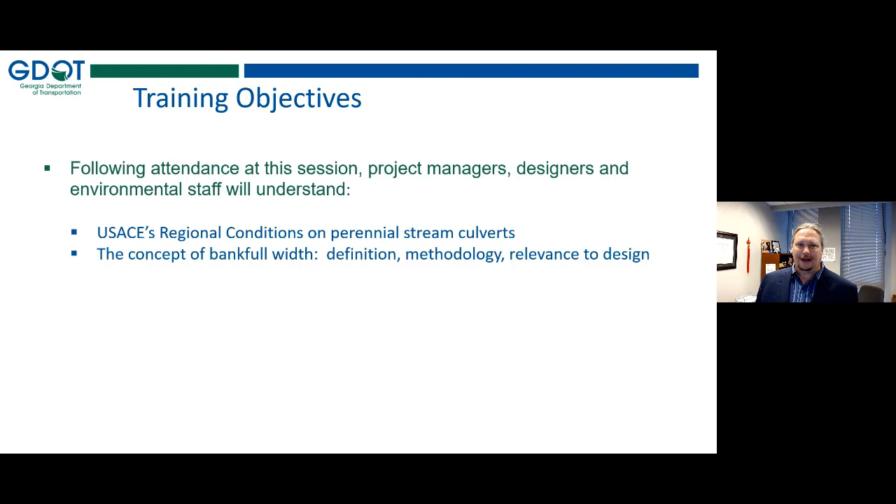All right, so the goals stated for today's session are the following. We want folks to understand the regional conditions as it pertains to perennial stream culverts. We want to make sure folks understand, as best anyone can, the definition or concepts of bankfull width and ways to identify that all-important metric. Bankfull width—that's a new phrase for you, get used to it.

Project delivery implications for projects with perennial stream culverts—this is really a summary point to make about project delivery. What's interesting about our presentation is that between myself and Sam, representing the Office of Environmental Services and the Office of Roadway Design, we have roles that hand things back and forth. Initially, when ecologists are doing resource ID, we will be the ones to identify these perennial streams and make the first field estimate of the bankfull width, hopefully an accurate measurement. We're also going to talk about what Sam's folks, the designers, can do as well as ecologists can do, in advance of that field work and after it.

Project delivery implications begin when we're doing these surveys for resource ID, and it carries all the way through permit application, which is just prior to let. In terms of project delivery, where the rubber meets the road is generally at let, and if we cannot obtain permit authorization, we cannot certify the project for let. So that's what makes this such an important topic for us all to know about.

Sam is going to dig further into how to design a culvert that complies with these regional conditions, and also how to address perennial stream culvert requirements, including diagrams for the Section 404 permit application. Okay, without further ado, I'm going to give my portion of the presentation here.

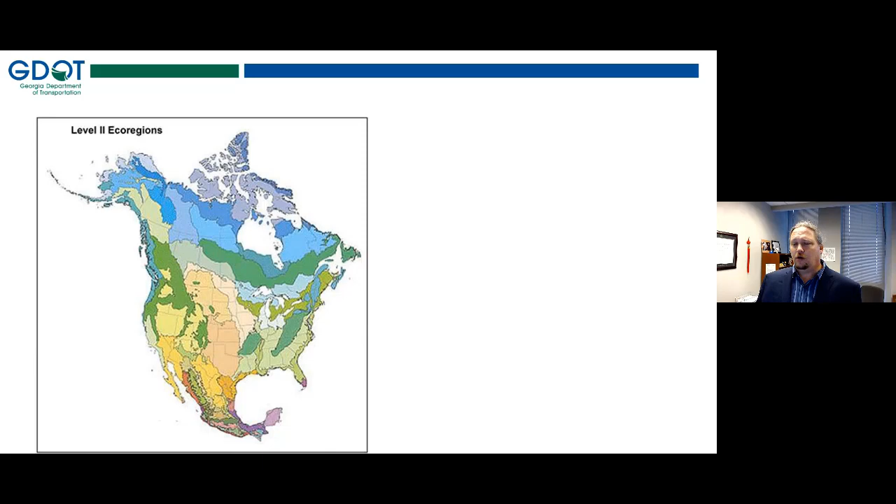Water is all coursing over our state on its way back to the oceans, either the Atlantic Ocean or the Gulf of Mexico, which is an extension of the Atlantic. That water on its way has hundreds of miles to go. So even though it's contained entirely within the state of Georgia, the Altamaha River and its extensions, the Ocmulgee and the Oconee going furthest upstream, if you put your canoe in at the very upstream end and got to the Atlantic Ocean, you would have traveled nearly 400 miles. This is not a 400-mile tall state.

Sinuosity. Water does not travel in straight lines. That's another key to this. When we put water in straight lines, such as in a box culvert, we are greatly modifying what water naturally does when it interacts with other more natural substrates.

So again, I'm introducing these broad themes so that y'all can understand the goals of our data collection and how we're going to present that data to the U.S. Army Corps when dealing with box culverts on perennial streams.

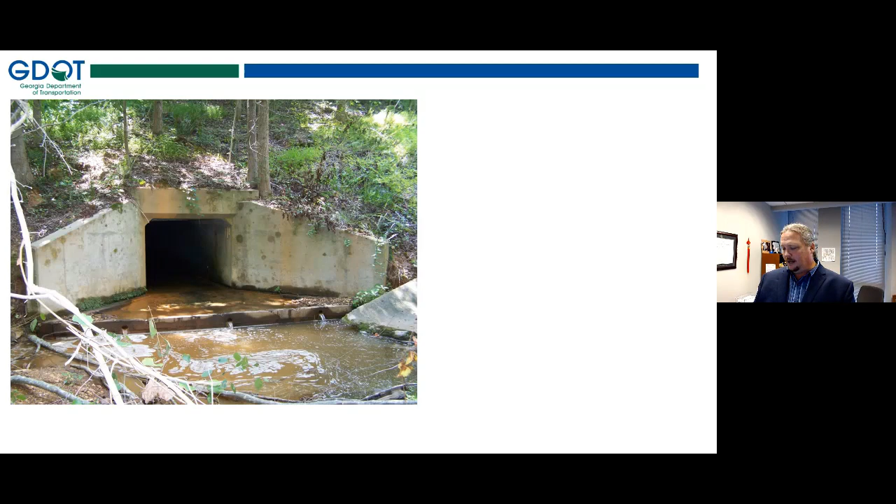Another thing about this culvert is it doesn't have natural substrate on the bottom of it. Natural substrate is obviously something that creates habitat within a stream system. It creates dynamic flows within, eddies and so on for the water. There's shelter for critters within that substrate. If you have what's essentially a sidewalk paved on the bottom of your culvert, you don't provide any of those things for this aquatic life that formerly was using, presumably, that reach of stream.

So in order to try and be thoughtful about maintaining aquatic connectivity while building roads, we need to not just think about how we're getting humans over top of the stream, not just how we're getting traffic over top of the stream, and not just how we're getting water off our roads to keep them safe. All those things are important. Those are all goals of the Georgia Department of Transportation. Another goal ought to be maintaining aquatic connectivity. This is no small thing, because you can't just put your fish on a leash and walk across the street with it.

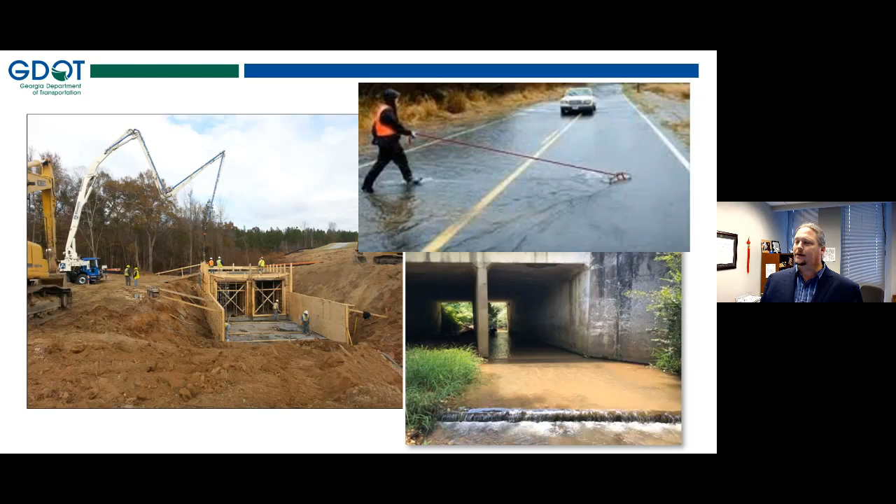I will say that these culvert lips and so on, going out there over time, it can be difficult to conceive of a culvert you're going to put in place that will be there for, say, 50 plus years, while this dynamic system is operating around it, upstream and downstream of it. It is not necessarily a surprise that these changes in elevation occur over time due to scour and other erosional forces. What we can do is anticipate that, and that's why embedding culverts is so much better, in theory anyhow. And it makes sense to me that when we embed the culvert, when we allow natural substrate to colonize the bottom of that culvert, we're providing all kinds of benefits to that stream system, as well as the connectivity for aquatic life.

All right, so that is the broad view of why this matters. That's the broad view of why the U.S. Army Corps is requiring GDOT to be thoughtful about our approach to this. And at this stage, I want to turn to the U.S. Army Corps' regional conditions on this subject.

I will say at the outset here that regional conditions, there's two things. There's regional conditions and regional permits. I've gone over this once before in a previous summer seminar series, but to reiterate, we have nationwide permits and regional permits, both of which have culvert considerations, and the latest version of those to come out is associated with the 2021 nationwide permits. What is confusing, and I'll try and explain clearly here, is right now we have essentially three different sets of conditions that could apply to these things, which is to say the 2021 nationwide permit regional conditions. We also have an existing set of 2017 nationwide permit regional conditions, which have not yet expired.

These new ones didn't replace all the old ones. And then finally, we have a set of regional permits issued by the Savannah District, and those also contain requirements related to perennial stream culverts. So to try and cut to the chase about what is the right resource to look at, let's all turn our mindset to the culvert conditions in the 2021 nationwide regional conditions.

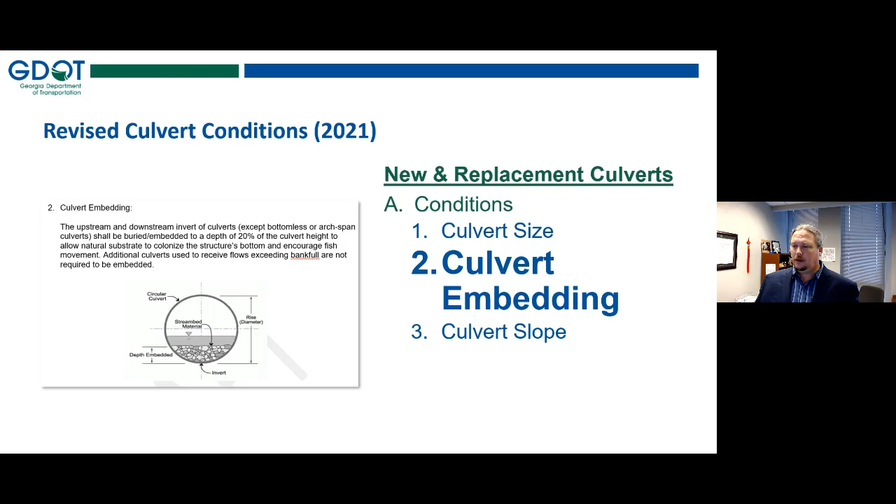Culvert slope is important. This didn't change much from the previous iterations, but one additional detail that's been added for clarity is that the goal is to match the existing stream channel slope within 25%.

If that can't be accomplished, a couple of things: one, we would explain to the Corps why that's not doable in that situation. Another important thing to bear in mind is that even if we can't get within 25%, we could still have a grade adequate for aquatic passage. So while that is the goal, it's not a hard and fast rule we cannot violate. That would make certain situations unconstructible, I believe.

Diagrams are a big deal now, so I'm going to look ahead at what the diagrams are here first, to kind of begin with the end in mind, as Sam likes to say.

What I want to do here is let you all know the intent, the outcome, for these efforts collaborating between ecology and design, and what is going to be submitted to the U.S. Army Corps of Engineers to approve these permit applications.

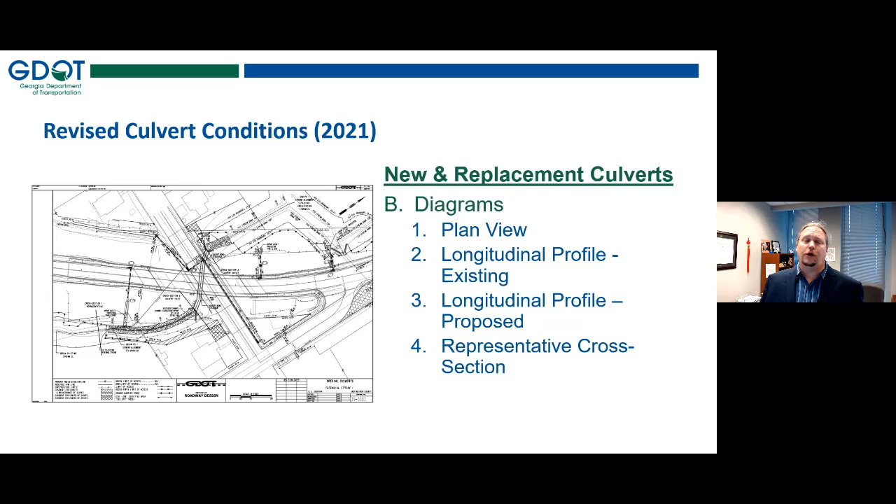The representative cross sections are very helpful - I'll talk more about why that term 'representative' is important. Then cross sections of the proposed inlet and outlet location, making sure the stream channel ties in to the culvert when we're picking up and putting down that stream, so those elevations match ideally. Bearing in mind the 20% embedment, by the way.

Here's an example of the existing longitudinal profile next to a proposed longitudinal profile. In this instance, this is effectively a schematic.

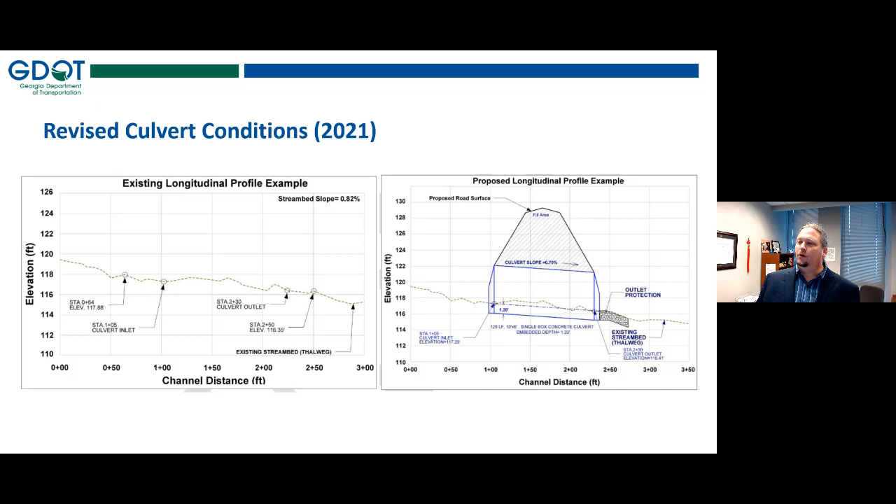In reality, we'll talk about the complications involved in gathering longitudinal profile data, but suffice it to say, this is what we're getting at - trying to take a sidelong view of the culvert to make sure we're meeting all the conditions with regard to slope, embedment, and size, particularly width. Width isn't a dimension we're looking at on the long pros, but width comes into play when we get to these cross sections.

As you can see, we've got a couple of terms here. I want to pause and let folks know flood prone and bankful look a lot like some other words. Bankful, in an ideal situation, in a stream system that may have achieved equilibrium for this moment in time, can truly mean top of bank to top of bank, and it's defined that way in many resources.

However, in Georgia, with our erodible soils and our very changed landscape over the last couple of centuries, we often have streams undergoing active morphologic change. When that's happening, bankful is generally not flush with the top of bank. Over my career, bankful has been a stumbling block for many folks because they assume it means what it sounds like - when the banks are full. That's not what it means. I'll give you a real definition so I don't give you a 'Dave definition' - otherwise it'll be something like humans are chock full of water, bankful is chock full of water.

Flood prone area is also a bit confusing because it sounds so much like floodplain. Floodplains are real things - you can see one here. The existing ground may well be the floodplain, although with bankful down low, that existing ground labeled may be a former floodplain, and now this system is cutting down and reestablishing a new floodplain inside that broader channel.

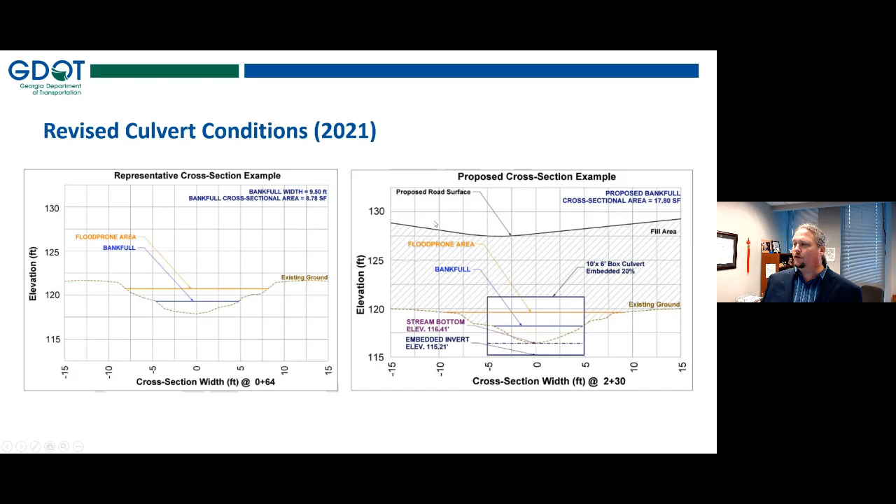So if that blows your mind, welcome to the joy that is trying to imagine what streams are going to do over time. Our best effort to identify bankful should yield a meaningful width for our culverts. Turning to the diagram on the right, you can see we're trying to find the right size of culvert that will accommodate bankful, but no smaller than bankful. You don't want to overly constrict a stream channel. That does bad things as well.

I'll also speak to the fact that we have plenty of projects that are beyond resource ID. In those situations, we'll talk about what you can do to try and make sure you have all the necessary information to create these diagrams and get these permit authorizations.

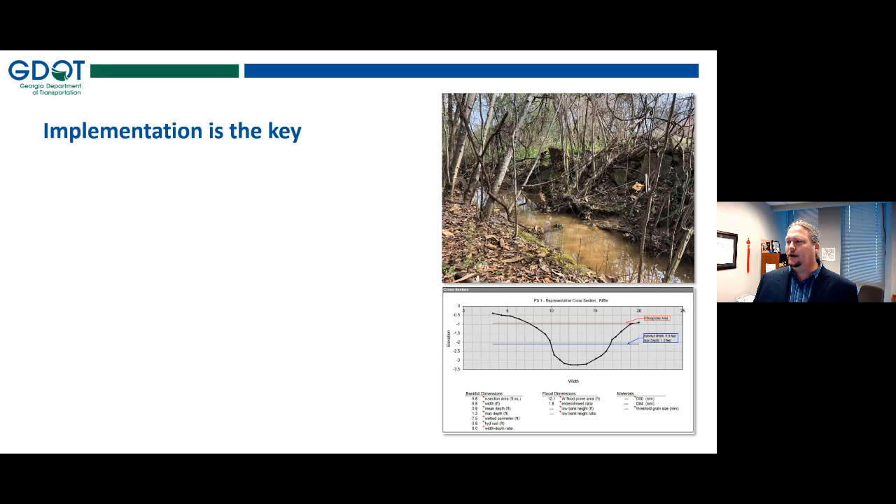So you take all these thoughts, all these ideas, all these concepts, you gather all of your data, and what are you going to do with it, and how are you going to gather that data as well? Implementation is the key here, and as I've said, we're reactive on projects already out of the gate where resource ID is in our rear view mirror, but in the future we're going to build that into our surveys from the very beginning of a project.

Also reactive in a sense that we have received comments from the Corps over the last 12 to 18 months on these issues consistently, and we've got a good body of practice now built out of the responses to those questions, and that's what we're sharing today.

I want to say that we're trying to turn to a proactive posture, not only for future projects, but even on ongoing projects, because those are all on their way to let at this point, and how we're going to gather the data for those is one of the key items we're going to talk about.

We're also going to dig further into coordination between ecology and design, talk more about what the internal guidance is that's available and that will become available.

And then in terms of permit submittals, I can't say this enough, and the Corps tells us this all the time: tell the story. What I've presented here, in case this isn't something you've thought of before, this is an important piece of our permit applications. Most ecologists have been through this.

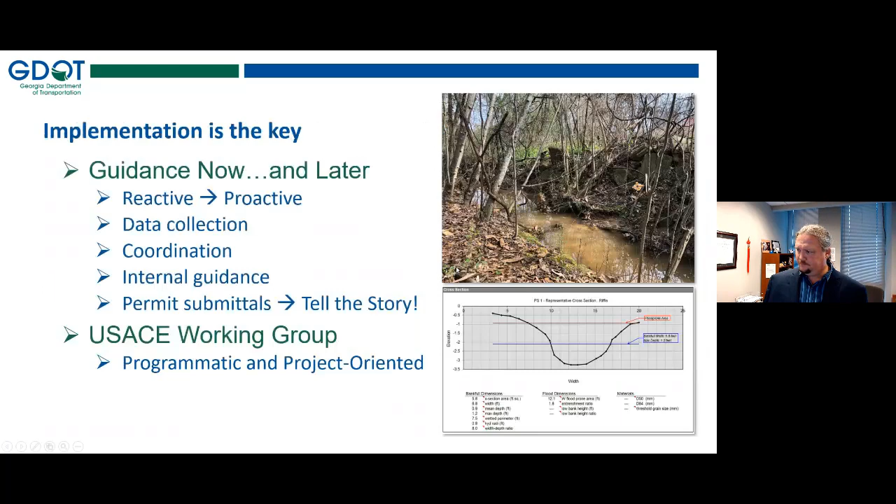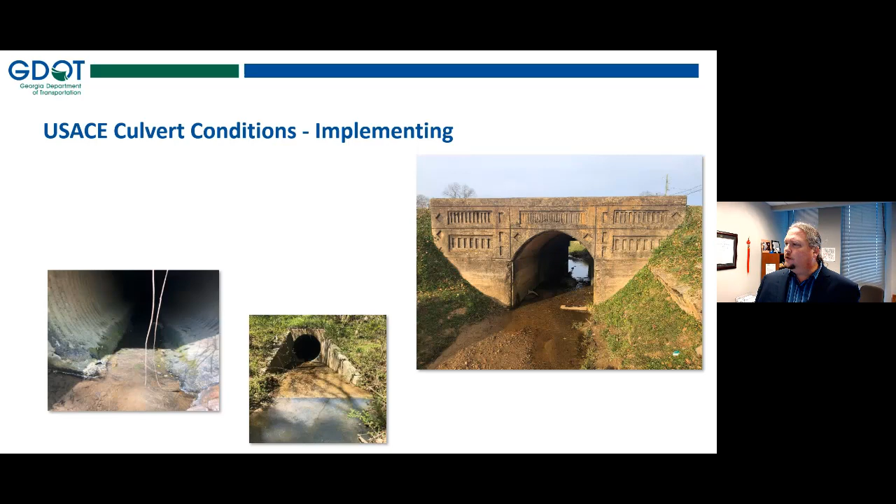Okay, so moving ahead, I'll dig into field data collection, coordination with design. We'll talk about ongoing projects and share tips for permit applications for ecologists.

Field data collection, as I said, can be done carefully or it can be done quickly. In terms of how careful we need folks to be, don't just glance at the stream and say that's about 8 feet and go on. Take the time to walk the reach, take the time to understand what you're dealing with, and take the appropriate instruments and equipment to get accurate measurements.

So for new projects, resource ID at perennial streams is important. Not all perennial streams that show up in an environmental survey boundary would require this level of diagrams, but when there's a perennial stream on a project, it's good to get these Bankful measurements correct. That part doesn't change from perennial stream to perennial stream. But in terms of which locations require these diagrams for perennial stream culverts, obviously it's only the perennial streams that are going to have culverts on them, not perennial streams that just nick the edge of the environmental survey boundary.

So while you're out there, Bankful width and maximum depth at Bankful are the critical data points to get. We also need a GPS point so that we know exactly where this data was gathered from, and photos, documentation, and narratives. Can't say enough about this: while you're on site, do the work while you're there, get all the information you can. It's always frustrating to come back to the office and think, man, I wish I would have written that down, what did I see over there. So that's a hard lesson learned from doing field work.

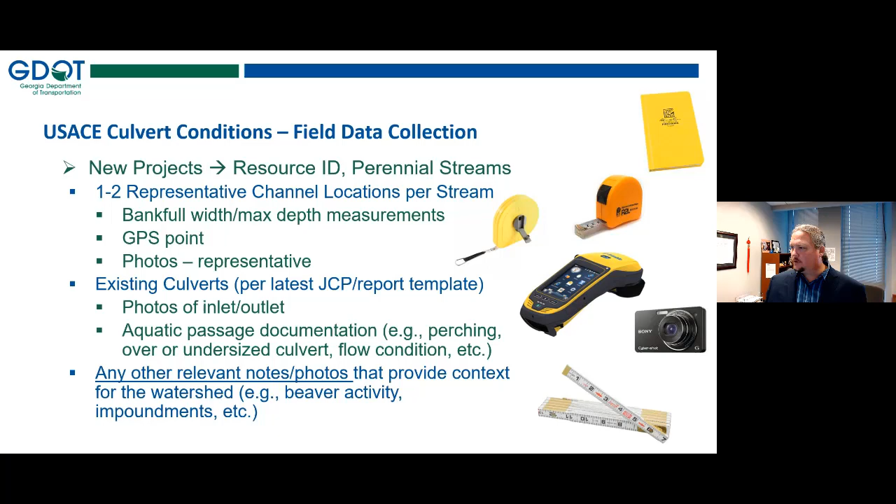So how do you identify these representative channel locations? A riffle or a ripple is a fine place to do it. Again, these are stream geomorphology terms — ripple is specific to sandbed streams. Forgive me if I mentioned earlier, runs are not the ideal location, although if you're unable to find a riffle or a ripple in your given area, a run is probably your next best place to look.

You're looking for what's stable, typical, and most natural, and you want to avoid pools, bends, and overly wide or constricted locations or abnormal sections. Those aren't going to be informative.

One other thing that we used to do that we should not do anymore, y'all: giving a range of bankfull. Bankful, again, this theory holds that there is a given point within that channel that is the appropriate width and height for what I'm calling effectively the stream typical section.

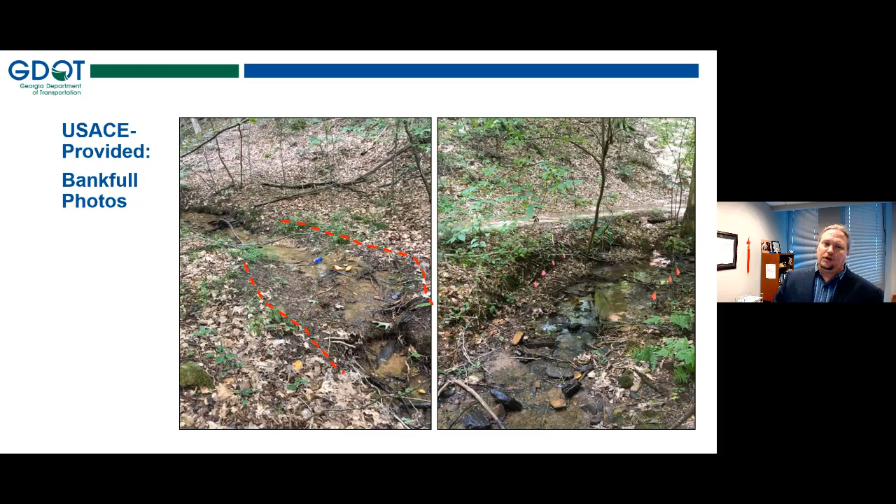Here's some more bankfull photos. The U.S. Army Corps of Engineers provided these. This again may not be what you're expecting when you hear the term bankful. On the left, the Corps has input some dashed lines as an indication of where bankful would be on this system. And on the right, you can see that bankful is apparently flagged.

Tough bankfull calls, I've talked about these plenty, but here they are. Imagine being an ecologist and somebody says, just look for the wrack line and the benches and so on in this system. Well, this system is getting plowed through by so much water at a time, and the banks are unstable enough that this thing is changing rapidly. When that's happening, channel evolution continues. It forms and it reforms and it reforms.

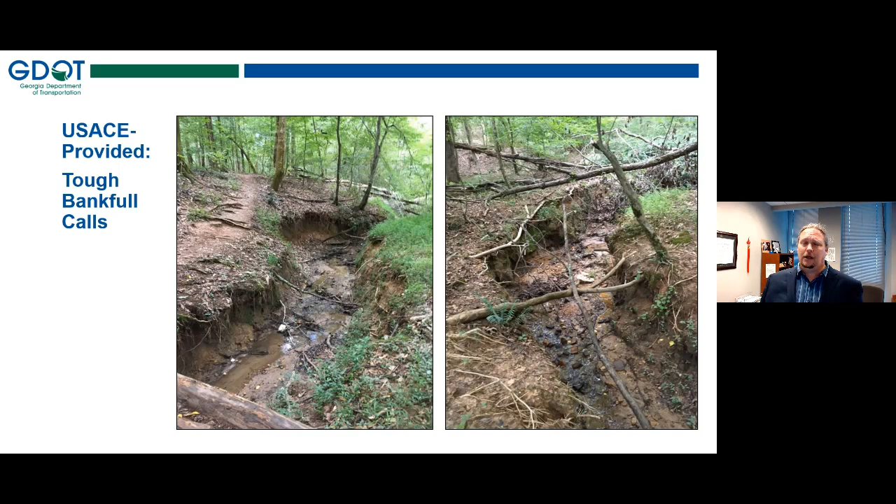So through chaos, order emerges over time, but right now what we're looking at is chaos. That is a very difficult system to take engineering principles and careful measurements in and say, with great confidence, I can tell you the exact right width of this system is X. I'm not trying to diminish the challenge here for the ecologists, but I am saying we all need to rise to this challenge if we're going to try and reconnect these watersheds that otherwise we as a department risk disconnecting through our activities.

Coming from Penn State, they've got a good resource in terms of guidance determining bankfull, and I just wanted to share some of what they've put out.

Bankful flow is the elevation point of incipient flooding, which makes sense to me. I'm not qualified to question others' definitions here, but I will say that the point of incipient flooding can be a little bit misleading because it sounds like top of bank. And again, in Georgia, the majority of streams I've looked at, bankful is not at the top of bank. Channel forming flow is a much better way to conceive of it, because this is less about the channel itself and more about the flows that create the channel.

Field indicators that are so helpful include changes within the bank slope, depositional features, changes in particle size, which is where substrate is very important. Obviously, sand sorts out much easier than gravel, much easier than cobble. When you get sediment sorting and changes in the sediments within the stream bed, that's an indication of geomorphology changes: riffles, runs, pools, glides. Those are all based in part on interaction with the substrate. Vegetation changes and scour features are also important.

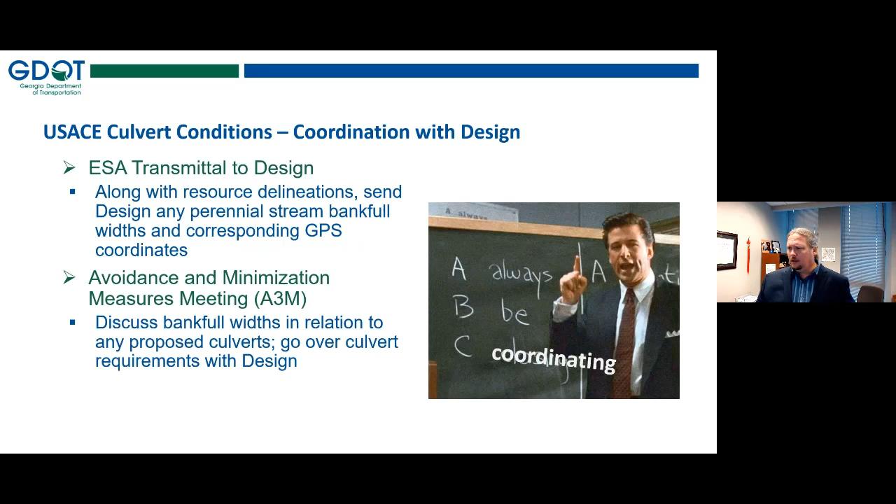Ecologist as advocate is, in some ways, almost part of our office's identity. We're environmentalists in the Office of Environmental Services, so in that regard you might consider us advocates. I will say, this is a big tent operation, y'all. I don't want ecologists to take the impression that advocating for replacements because the ecologist thinks it's warranted means we die on that hill, so to speak. There may be occasions when an ecologist feels strongly and does want to force that point, and I don't mean to say you don't have a voice to do that with.

I do want to remind everybody, to try and get the value out of this that's intended, we do need to collaborate. We do need to work as a team. And so, as Alec Baldwin tells us in Glengarry Glen Ross, but slightly differently: always be coordinating.

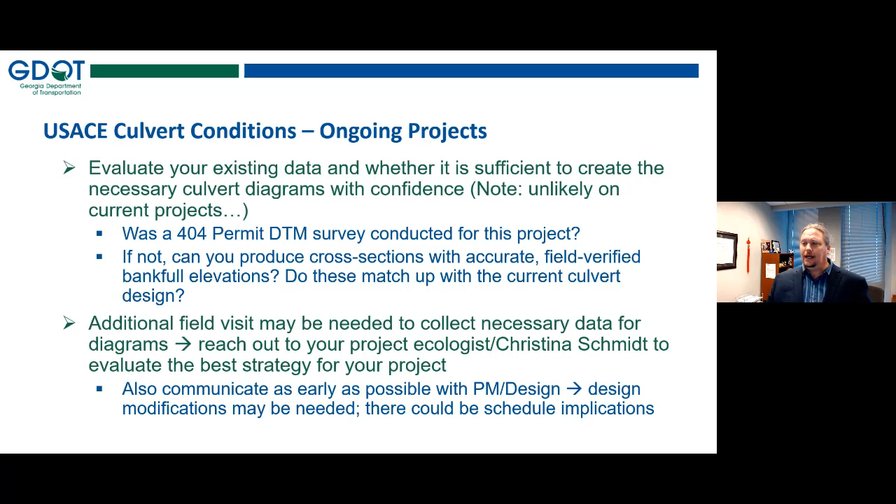Now, if this information is insufficient, but there's field work coming up for another reason, please try to align it with that field work. We don't want to create a whole bunch of rework out of this, but once we dug into the existing data, we did find that in practice GDOT didn't have all the data needed to satisfy these permit conditions on a project-by-project basis, which means follow-up survey is important when it's necessary.

All right, tips for permit application: tell the story.

Supplemental PCN question number 7 is your opportunity to do that. That's where you want to tell the story in terms of connectivity, design constraints, etc. Existing and proposed conditions are critical.

Unique circumstances are helpful to know, and explanations and justification in instances where we can't meet the conditions. There is an exception within these conditions that says if you can't meet any of these conditions for practical reasons, explain why. That doesn't mean we automatically get a permit. They could challenge us on our reasoning, but that blow-off valve exists to address the fact that in some instances, all these conditions may not be met, and we still will need to continue with the efforts that are GDOT's undertakings.

Justifying extensions versus replacements is important. The Corps has said that they don't intend to force GDOT to replace a culvert, which is heartening to hear from the GDOT side, that we still decide what we're doing with our structures. I will say, the other side of that is we don't want to work in bad faith with the Corps or with the environment, frankly, and not replace a culvert that otherwise needs replacement in order to avoid this work. Please do the right thing.

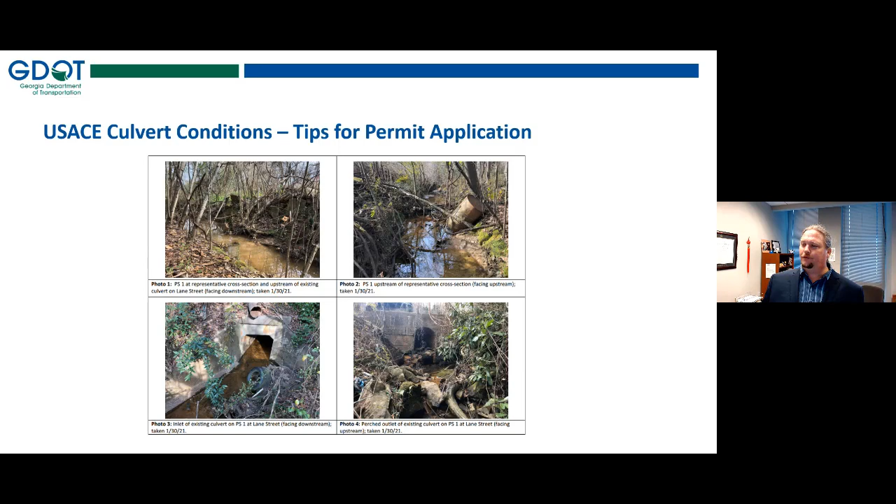References to culvert diagrams is helpful in these PCN supplemental information, and photos are extremely helpful. Take good photos, get the context, don't just zoom in on the channel, get the broader area. They are very helpful for years to come once you get them.

In terms of diagrams, focus on clarity. I'm going to leave it to Sam to really rigorously get into this, but for ecologists, be a good partner to your designer. Help them, give them advice.

Understand that for many folks in the department, a lot of this is a new undertaking, so don't be afraid, everybody, to admit you don't know something. We're all learning as we work through this. It's been a very informative 1.5 year undertaking to get to where we are today with all of this.

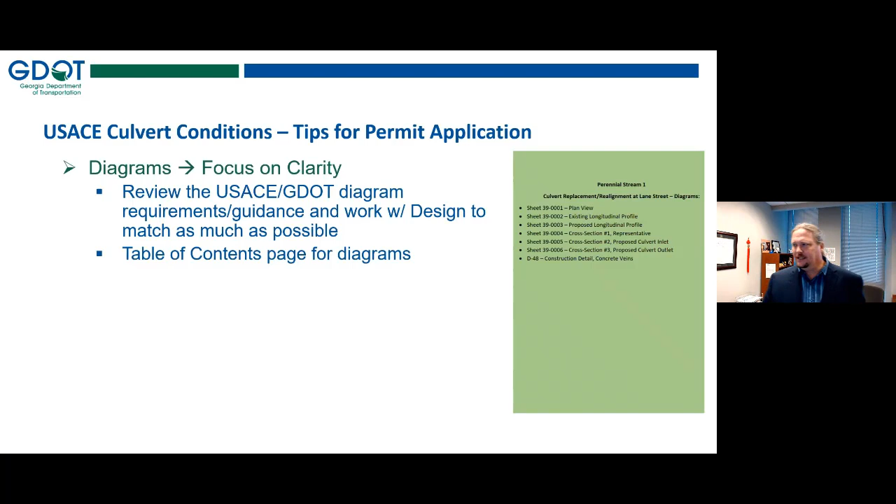Including a table of contents is helpful. PDF markups are helpful. And just to let you all know, the Corps is really dialed in on bankfull width and culvert width. That is the all-important measurement. If there's one thing to take away, that's probably it.

Embedded depths are important, but I think that GDOT engineers are already well aware of the need to design an embedded culvert in most cases. And then stream and culvert alignment that includes any cut fill that may be needed to connect the culvert to the channel, that's all important to include as well.

All right, here's a few takeaways before I turn it over to Sam, and actually a few takeaways before our break. Sorry, I've blown past 10 o'clock, but we'll wrap it up quickly here, take a break, and then move forward.

Work proactively with your project designer and PM during the concept phase and through the permit application phase. As Sam likes to say, begin with the end in mind. Prepare for your field visit, ecologists, by reviewing the available relevant information. Gather accurate data in the field, such as bankfull. While on site, gather photos and take careful notes on substrate and existing connectivity.

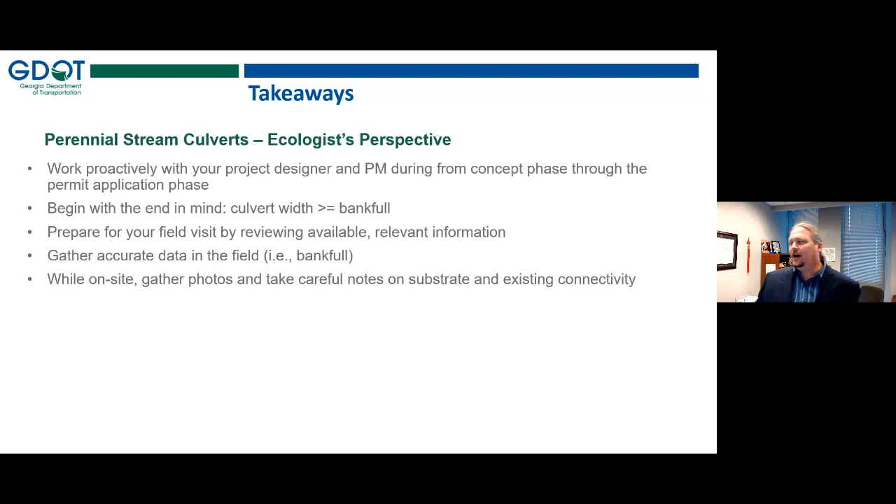Lastly, note that these conditions are relevant to the 404 permit, but there are other constraints or considerations with regard to culverts and perennial streams coming out of either Section 7 of the Endangered Species Act or the Fish and Wildlife Coordination Act under our joint coordination procedures, which Chris Goodson presented about last week. Forthcoming guidance and data sheets will be helpful. We are working to prepare those for GDOT practitioners, so look ahead to that.

Finally, just approach this collaborative effort openly, everybody. This is an opportunity for us to make some good decisions, and together I think we can make our best decisions.

So I will pause to see if we have any time for questions. Christina, as the moderator, is there maybe one you want to launch out there that might be informative? Yes, we do have one question, which is about bankfull versus wrested vegetation. It appears they're asking what would be the difference between those two.

Great question. In Georgia, wrested vegetation is important. That phrase is straight out of the buffer regulations, and in terms of state waters, a state water is buffered in the state of Georgia in part if it has wrested vegetation, essentially, which is to say that the flow of the channel prevents vegetation from growing or pushes it over where it butts up against it, so to speak. So wrested vegetation is often right up against where more frequent flows occur, not the 1.5 year storm, but rather flows that are happening weekly or monthly or so, on some greater frequency level.

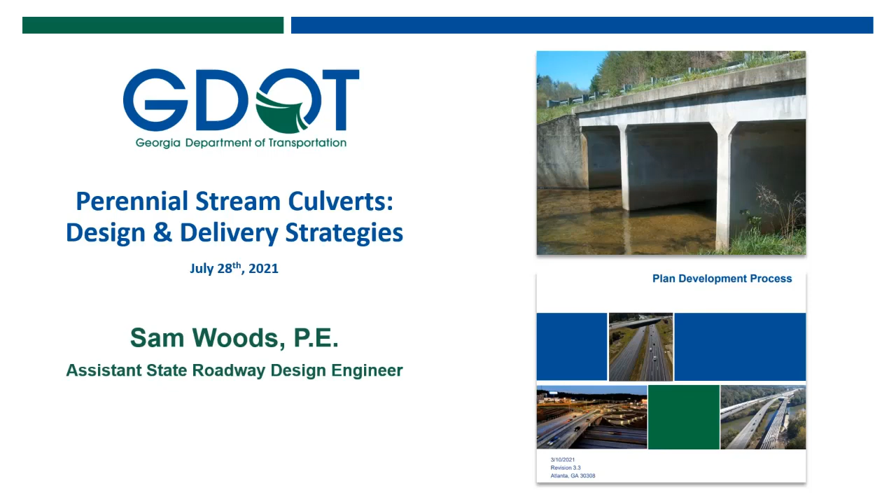All right, good morning everybody. My name is Sam Woods, and I'm here to talk to you about Perennial Stream Culverts, design and delivery strategies. I work in the Office of Roadway Design as one of three assistant roadway design engineers.

I'd like to start by talking about the outline, what I plan on speaking with you all about this morning. I've divided it into two main categories. First, a brief introduction where I'd like to talk about context of this whole topic and the engineer's mindset, and then go into a little bit more depth about the engineer's responsibilities, really dovetailing with what Dave took us through on the ecology side.

Under the broad topic of context and engineer's mindset, I'd like to talk about the overall application and scope of this topic and how it fits into the PDP, the plan development process, and encourage us to take, instead of a complete 180-degree turn, at least an approximate 90-degree turn in our mindset and our approach to designing culverts on perennial streams.

For engineers' responsibilities, Dave built me up well here to say that I'm going to begin with the end in mind, which I will. That's to introduce this whole topic, and then we'll walk through the three main phases of the plan development process, starting with concept, talk about environmental coordination, make our way through preliminary design, where we're doing the actual design of the culvert, and end up in final design, where I'm going to talk about documentation and plan production—basically the assembly of those 39 series drawings for the permit application for the perennial stream culvert diagrams.

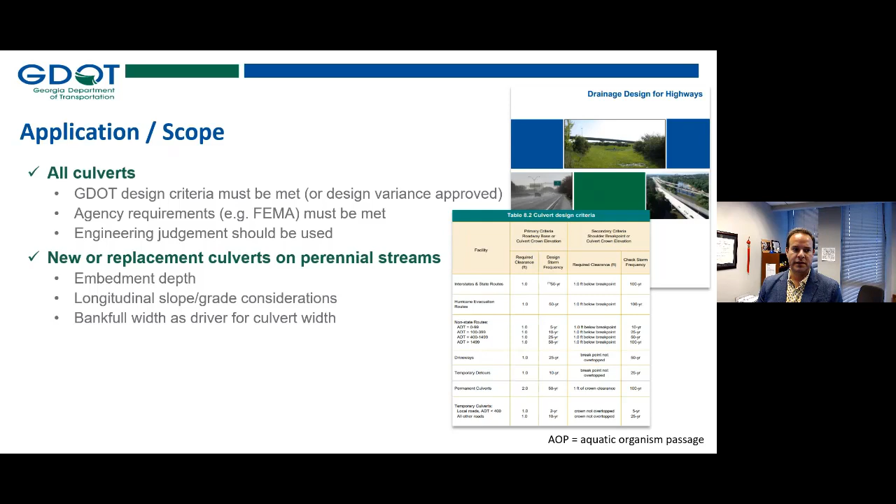Specifically for perennial stream culverts, these three topics—you'll hear this over and over again, you heard it through Dave's presentation, you'll hear it through mine—embedment depth, grade, and bankfull. These are the new concepts coming out of the regional conditions. They do not take away from GDOT's criteria or, for example, FEMA criteria.

So to put this in high-level context within the PDP, thinking through PDP milestones in these three categories: target or primary goals—when are we supposed to have these things done so that we can deliver our program? For perennial stream culverts, it's really focused on two milestones: the submission of preliminary plans to GDOT offices.

At that point, our culvert is designed and technical studies are being kicked off, and it should end at the environmental lockdown plan submittal, where subject matter experts in environmental will be assembling that 404 permit application package.

How do we get there? Where does the work get done? Where does it get developed and coordinated? Well, in the environmental resource ID phase and at the A3M. And like everything, we have check milestones like field plan reviews and constructability reviews, where we're just confirming that our design is appropriate, constructible, doesn't have constraints or conflicts that the engineer wasn't aware of originally.

This next slide is really just a graphical representation of this same concept, because I like to reinforce it on the PDP Appendix O. So at the top, you're seeing avoidance and minimization beginning at the very beginning of the project, and transitioning into track and document changes.

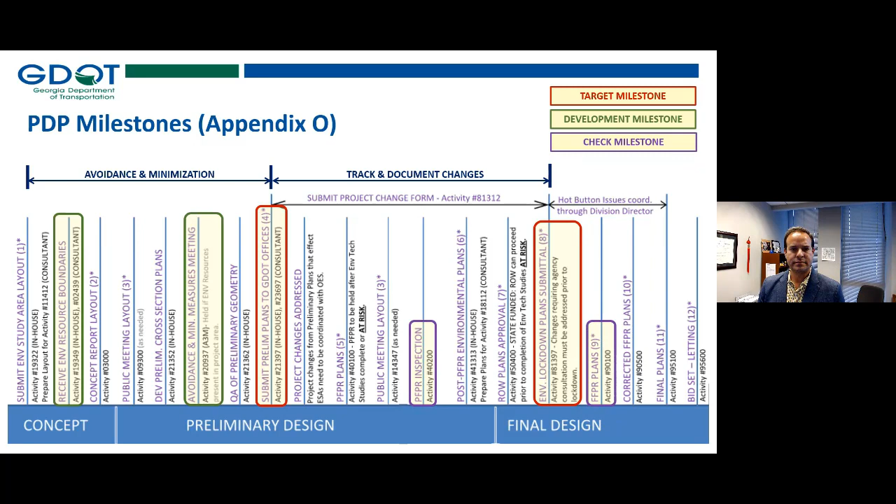The next slide is just a quick example of what Dave mentioned earlier, the fact that the PDP does already contain guidance on the A3M and does mention these high-level concepts that we're talking about. It occurs after resource identification is complete, and our duty is to avoid and minimize impacts to those ESAs.

All right, so let's move on, please, to our change in perspective, this complete 90-degree turn, or something like that. So here's a beautiful snapshot of a GDOT project, and GDOT's mindset, because this is the purpose of our agency, is to be based along the roadway and our other transportation-based assets.

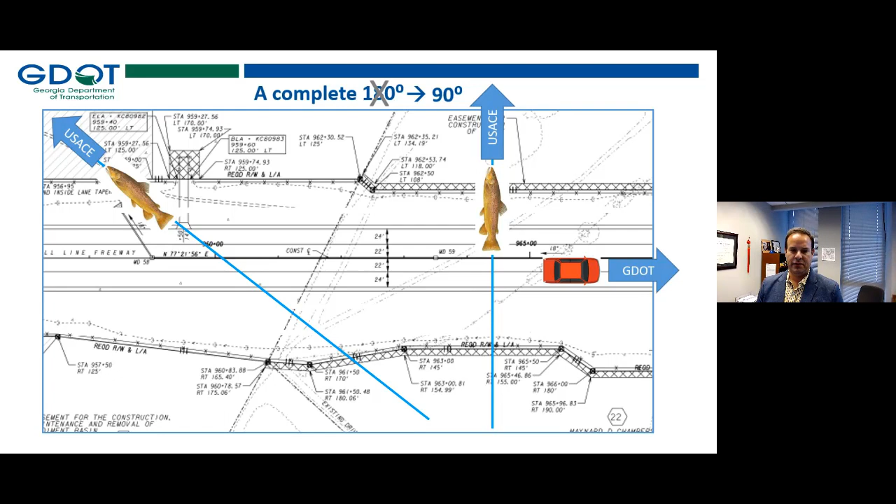Okay, so let me add to this screenshot a few very simplified schematic versions of streams and point out that a different agency, the USACE or Army Corps of Engineers, their perspective is different, to state the obvious. They are concerned about their resources just as GDOT is concerned about our resources. So we've got two agencies working together where our resources overlap, and we're trying to figure out the best way to provide this aquatic organism passage.

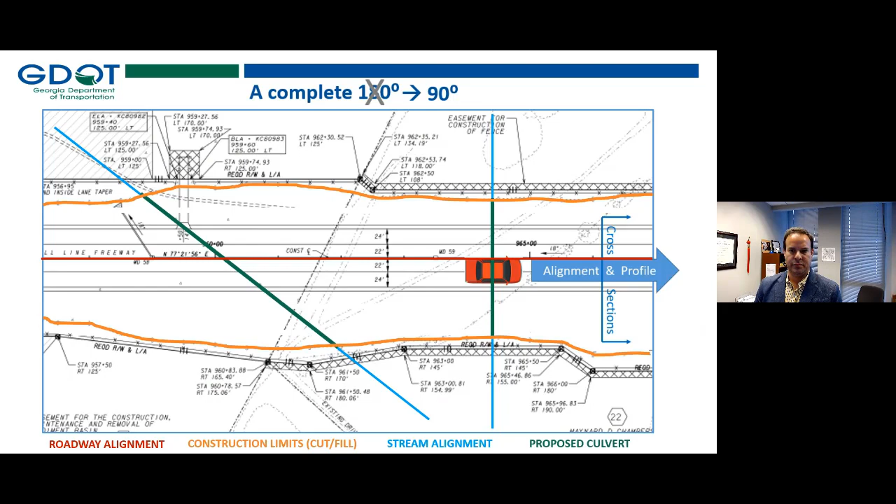So let's drive that same GDOT vehicle through our project and notice that by definition of the roadway, we are setting context and convention for how we think through things. This is how engineers design, this is how contractors build. Alignment and profile along a roadway and cross sections perpendicular to it or to some skew.

If I show again the different perspective of the Army Corps of Engineers, again, we're rotating roughly 90 degrees, imagining the stream as the resource and the aquatic organism passage. Streams also have alignments and therefore profiles and then cross sections along. So this is the change in mindset I'm mentioning and will be reiterating throughout my presentation.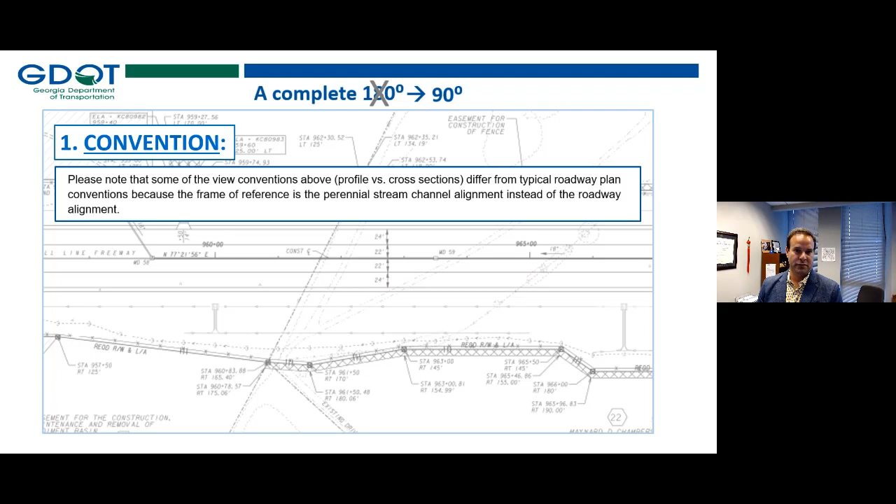The second point to me is the more important one to make and the harder one to do. And that is to, yes, convention is one thing, but really the challenge is to have this different approach, modify your mindset and approach to the design and plan production of that culvert as an engineer.

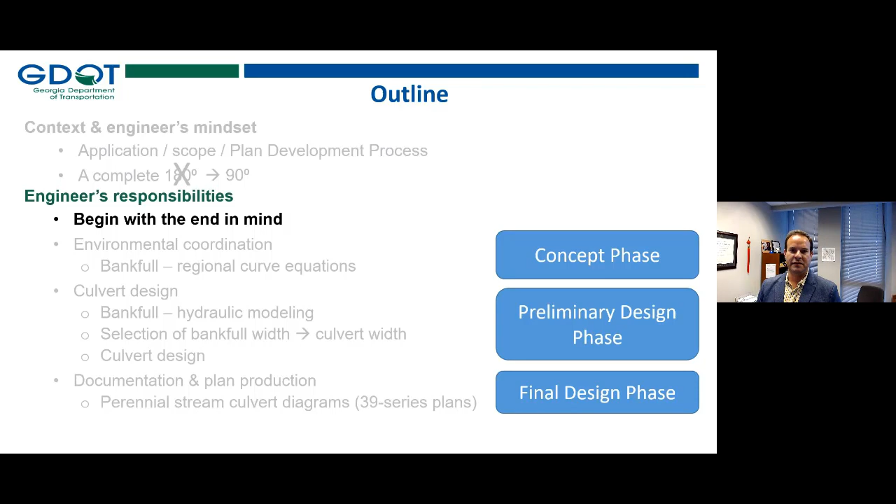All right, so we're going to move on to the next section of the presentation, which is the engineer's responsibilities. Again, to refresh, let's begin with the end in mind. The end in mind is to design the correct culvert. And what does it mean to be a correct culvert on a perennial stream?

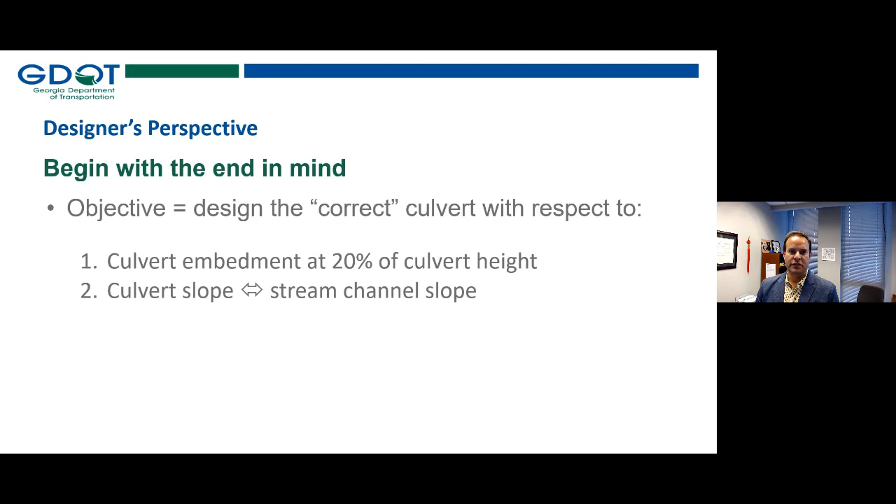It means that the culvert embedment is set at 20% of the culvert height. It means that the culvert slope generally mimics the slope of the stream channel. And it means that the culvert width is greater than or equal to the bankfull width.

The third one, not so much. I like how Dave said it was a gray area that we're trying to turn into black and white. The idea of bankfull width is not straightforward, and it is also something new.

So with that in mind, let's keep going and refresh our memory on three major ways that we've identified to collect bankfull information on a particular stream. One of them is regional curve equations.

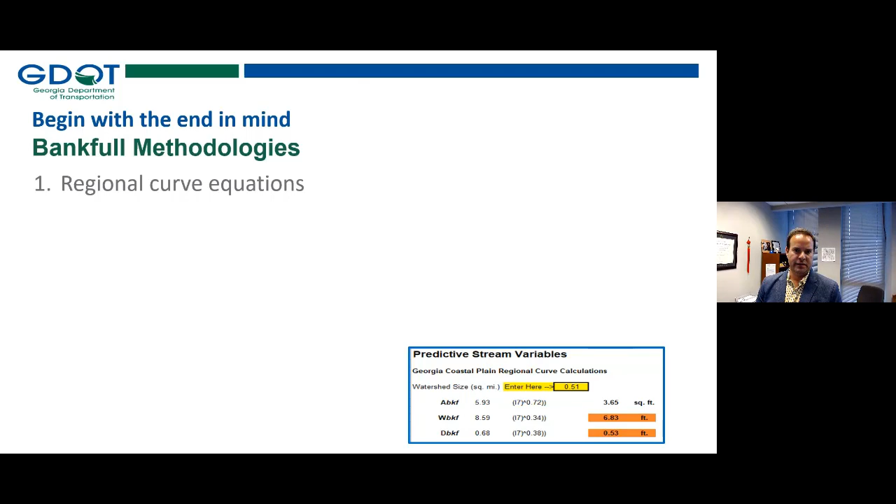Dave mentioned these briefly, I'll go into a little bit more detail momentarily. Dave went into a great amount of detail on the ecologist field measurement, which is an absolutely critical component of this bankful collection. The third method is to do hydraulic modeling, and we'll go into a decent amount of depth on some later slides on this. This is where the engineer will take a certain flow and model it within a stream cross-section from the survey.

So before beginning design, it's very helpful for engineers to also read the guidance on perennial stream culvert diagrams. This is what GDOT has written, and it's going to give you a lot of great information. Also read the regional conditions on the culverts to help give overall context. And the reason I want to mention this is if you don't read both, it can be unclear exactly which variables to focus on.

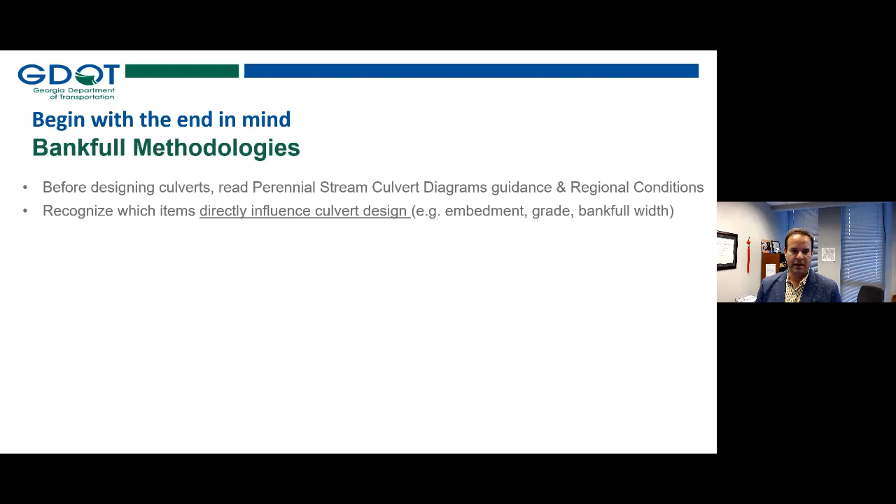So you want to recognize as the engineer which of those variables actually directly influence the design of the culvert. And again, here's those three magical variables again: embedment, grade, and bankfull width.

Maybe equally as important, recognize which items are required on diagrams to comply with these conditions but do not influence the design of the culvert. Dave mentioned flood-prone areas, easy for me to say, and I'd like to add on bankfull cross-sectional area. These are examples of terms that can be confusing, and it would be easy to see how as an engineer you might need to consider these within the design of the culvert.

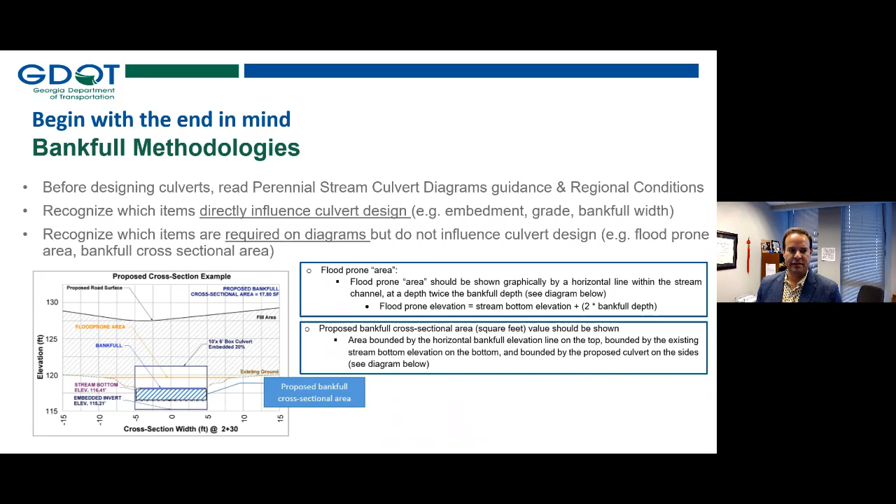Instead, let the guidance that GDOT has written in some sense translate the regional conditions. Let this help you out a little bit. For example, for flood-prone area, we just converted it into a very simple equation where once you know the bankfull depth, then you can easily plot that flood-prone area. And similarly for the proposed bankful cross-sectional area.

All right, we're moving on now into the concept phase, where we're going to talk mostly about environmental coordination. The designer's part in this general phase is to quickly run these regional curve equations so that the ecologist can have that context in their back pocket as they go out to identify resources.

So just some high-level reminders of what's available and what we're doing in the concept phase under this larger umbrella of environmental coordination. We know where the project is, generally and somewhat specifically, because we should have developed an environmental survey boundary within which these resources will be identified. We also should know some information about the existing culverts and streams themselves, either from a site visit, first time out to see the project, coordinating with survey or environmental, or using existing data available through USGS maps or applications like StreamStats.

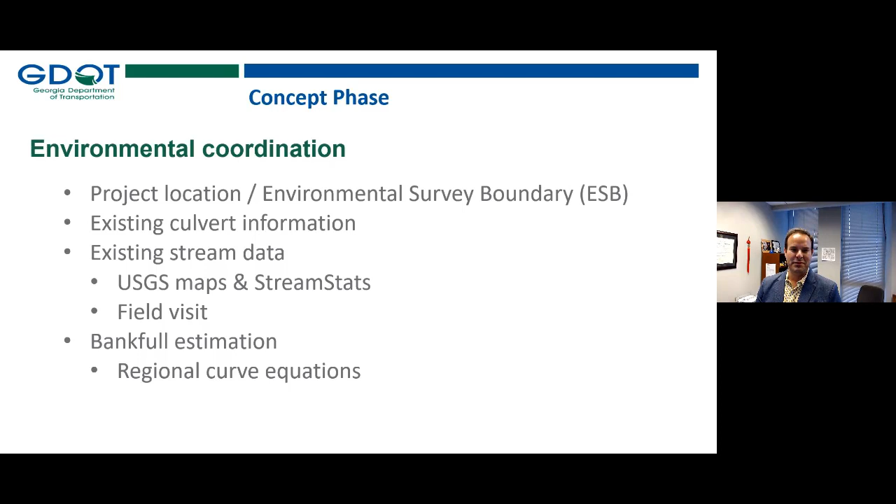So specifically for bankfull estimation within this concept phase, what the engineer is going to be helping out with is using these regional curve equations to determine one potential input to the overall determination of bankful width. And here's how that might look in concept.

So unless you're in that coastal plain, you'll very likely be figuring out where in our neighboring states' regional curves best fits the similar region and apply that curve to it.

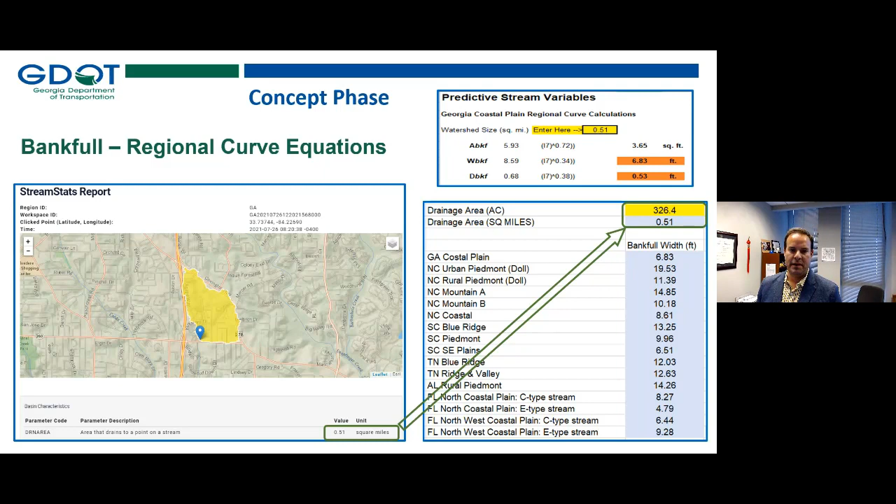So that's really it as far as the concept phase goes. We're going to move into the preliminary design phase now. Just like so many things on the roadway design end of things, this is really where the pedal hits the metal, where we turn a concept idea into a set of plans, into a project footprint. This is where we'll be doing the culvert design in earnest.

I'd like to talk about our third method of determining bankfull, which is to hydraulically model a cross-section from survey. I'll talk a little bit about selecting the bankfull that will drive the culvert width, and then talk about a high-level process of culvert design with this new mindset.

So in preliminary design, what information do we have? Environmental resource ID is now complete. Keep in mind with this new process that not only do we know what our perennial streams are, which we would even before this process, but now we also have additional information from ecologists, including their field measurements, pictures, narrative, etc., on bankfull.

We will also have a survey database which is complete. Now, this is a sub-bullet that we don't spend too much time on in the presentation, but we do want to introduce this idea. Our new process will eliminate the need for additional or supplemental field survey collected, what we used to refer to as the 404 survey, where coordination used to be required between surveyors and ecologists that would involve planting flags in the ground and surveyors picking up those flags.

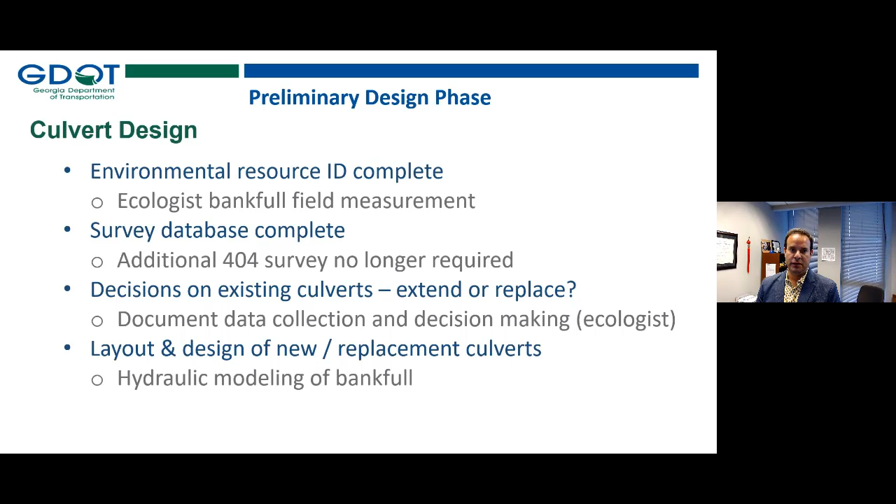Also, in preliminary design, we're making decisions on those existing culverts that Dave talked about. Is it the right decision to extend or replace it? Depending on that decision, that will drive where we end up in the design and documentation of those culverts. If it's an extension or replacement, we'll be documenting that decision. And if it's a new culvert, we will be hydraulically modeling bankfull and then proceeding on in final design with the full 39 series drawings.

So I want to talk in a little bit more detail about some considerations for existing culverts, whether to extend or replace them, and how they might relate to AOP, or aquatic organism passage.

I want to start by talking about a single barrel culvert. In general, if you've got an existing culvert out there, it has a width and height, it has a cross-sectional area. To state the obvious, this is a constraint on the design of any extension. So in general, we don't have wiggle room with respect to culvert cross-section to improve aquatic organism passage for single barrel existing culverts, although we do want to keep in mind that if we are extending it, there may be opportunities to improve that AOP through our longitudinal profile.

In other words, if the existing tie-in is slightly perched, we may be able to merge those tie-ins through our extension to provide an invert that is not perched. And for this case, because bankful would not be a driving indicator on that culvert design, since we know what size the culvert already is, there would be no hydraulic modeling required.

I want to introduce one additional consideration when it comes to multi-barrel culverts. For these cases, what we're recommending and asking engineers to do is evaluate the hydraulic capacity of that multi-barrel culvert, basically to see if there's additional capacity.

What I mean by that is additional capacity beyond what's needed to solve other existing design criteria and requirements, such as passing our 50-year flow with certain freeboard below the pavement. If that extra capacity exists in the existing culvert, we as engineers, in coordination with ecologists, should see if baffling some of the barrels not carrying the main channel flow can be accomplished, while still meeting our GDOT criteria and improving aquatic organism passage.

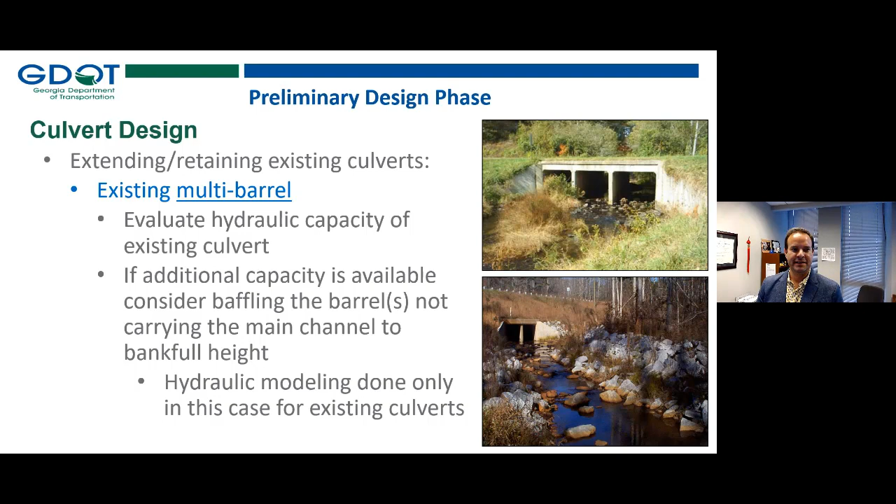In that case, we might be interested in the bankfull width and depth, and therefore hydraulic modeling by the engineer. Our three driving variables are embedment, slope, and width. Again, because bankfull width is the most complicated one, we want to dive into this topic a bit more, specifically with respect to hydraulic modeling as an engineer might perform on the project.

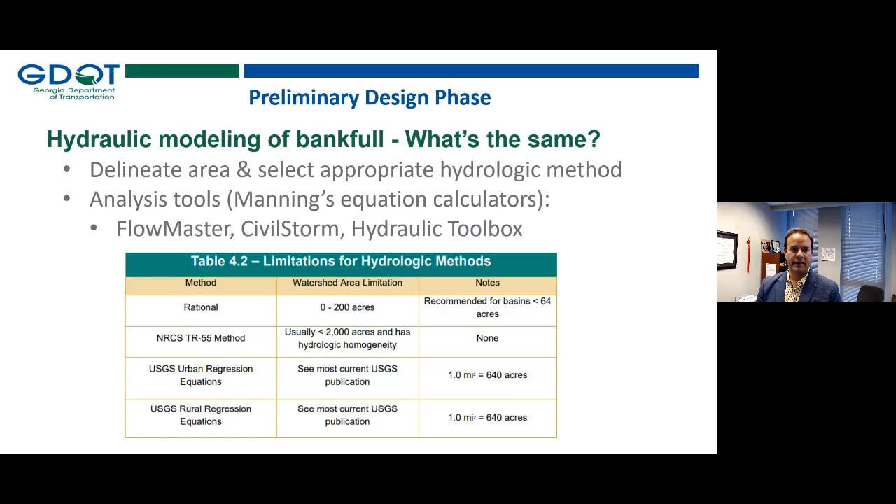Also, the analysis tools we're used to using for other types of analysis can also be used for this hydraulic modeling. This isn't an exhaustive list, but things like FlowMaster, CivilStorm, or Hydraulic Toolbox are examples of applications that are basically solving Manning's equation, and those are the tools we'd recommend for modeling this idea of bankfull. So that's what's the same.

What's new and different about hydraulic modeling of bankfull compared to our typical analysis? Essentially, our focus is switching from the culvert or roadway cross-section containing the culvert to that of a stream. Specifically, our study area, or point of interest as it's sometimes referred to hydraulically, is not the culvert inlet but instead a location along the stream. I've written stream cross-section here—this should be the representative stream cross-section, or as Dave put it, the typical section of the stream, which is a great way to tie our lingos together.

Another change is the Manning's n-value, or coefficient. With this analysis, that coefficient will be representing the stream bed and not the culvert itself.

This is a major takeaway of our presentation: engineers analyzing culverts are used to doing things like 25, 50, 100-year storms. We are analyzing a very different storm event here—it's the 1.5-year storm. Recognize that this value varies a lot across the state when it comes to different hydrologic regions, so conceptually it makes sense that this value would vary region to region. The 1.5-year value is what we've accepted, in coordination with the Corps of Engineers, as the best value to use consistently across the state. This is a main takeaway message here.

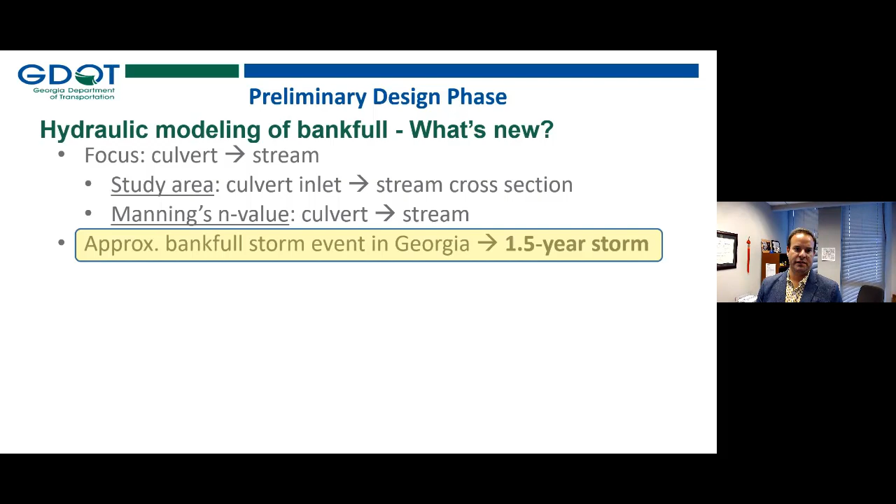Because data for the 1.5-year storm event isn't generally collected, we've got to take the next best thing we do have readily available: the nearby storms. Depending on your method, that's the 1-year, 2-year, and 5-year storm. Depending on your method, you'll be looking for different variables such as intensity and depth. But at the end of the day, in all the methods, what we're looking for is that 1.5-year flow to help us approximate bankfull.

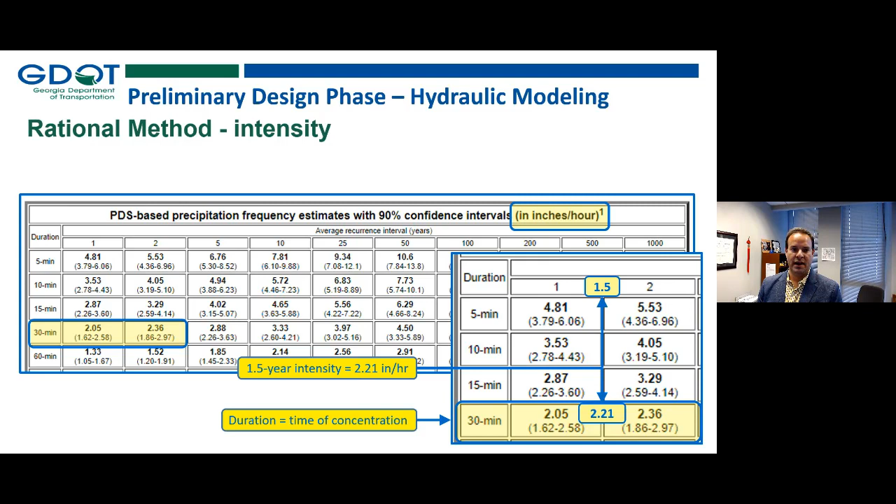The next few slides just show this same idea graphically, starting with the rational method. This is something designers are already used to doing—finding their time of concentration and a storm equal to that duration. Here you can see we can easily pull data for a 1-year and a 2-year storm, and for the 1.5-year storm, just directly linearly interpolate between those two values. So that's how you'd come up with an intensity for a 1.5-year storm using the rational method conceptually.

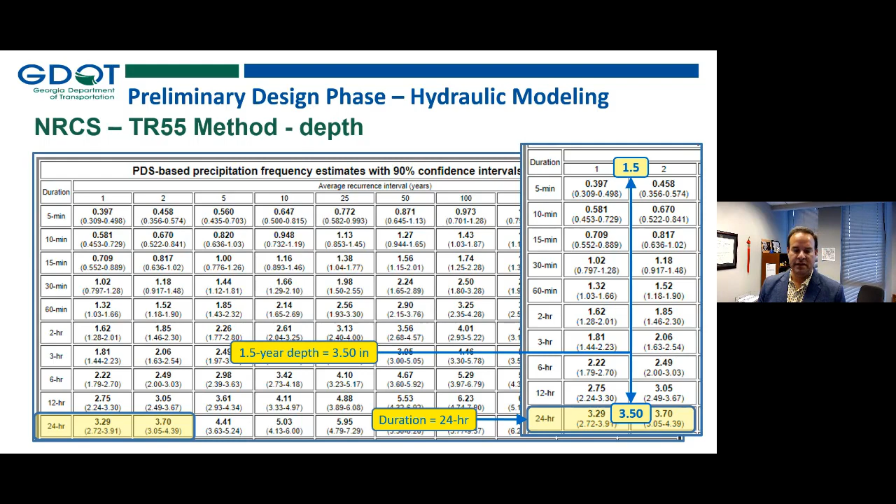Similarly, on the NRCS method, you'd be looking at a depth in inches using your 24-hour rainfall data, again looking between a 1-year and 2-year storm, and using that interpolation to come up with something like a 3.5-inch depth on that 1.5-year storm interval.

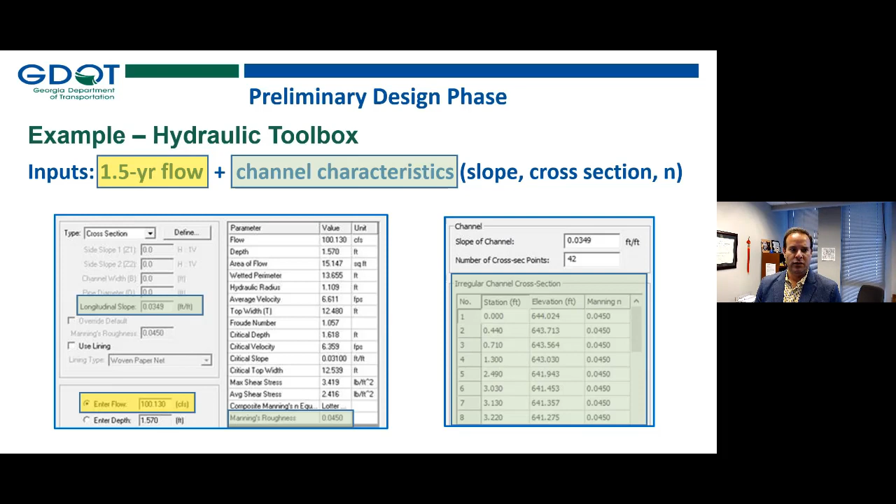Okay, so now we have our flow rates, and I just want to show you one example of how we might use these inputs on one of our tools, the hydraulic toolbox, to put our inputs of that flow and channel characteristics, such as the slope, Manning's coefficient, and stream characteristics, our cross-section, in order to get our main result, which is our bankfull width. So here in this slide, you're seeing that both reported numerically at 12.5 feet and then graphically on this cross-section.

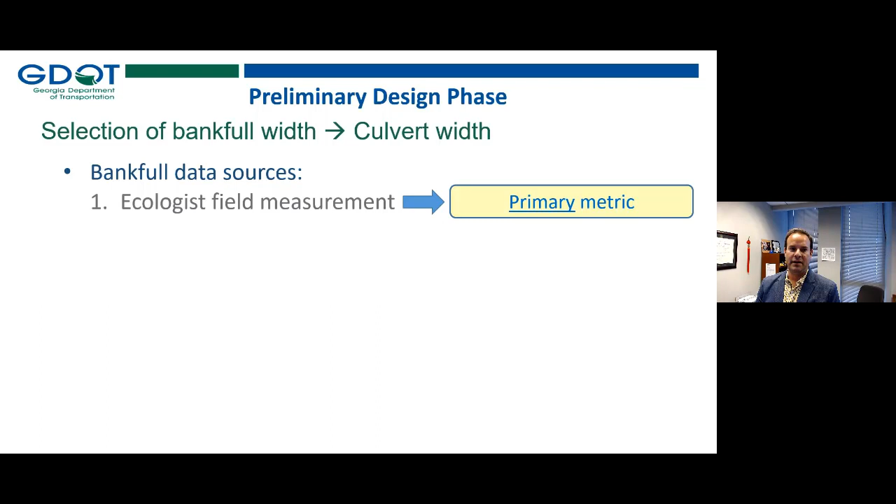So we're recapping a little bit here. We're talking about the different sources of bankfull data. We are considering the ecologist field measurement to be the primary metric, essentially because it's the real world. Even though it's a gray concept, this is a subject matter expert in the field taking actual measurements with tools they have available to them.

We just got done talking about hydraulic modeling in decent detail, and before that, regional curve equations in even a higher level of detail. And these in general need to be considered as additional metrics, not to be discounted, but to be considered in conjunction with the other bankfull collection and to be discussed before selecting the actual value that'll be used to drive that culvert.

This is reinforcing the same concept. I like the way Dave said it better: it's a gray concept we're trying to make black and white. It is important to recognize the imprecise nature and the limitations of these methodologies we're proposing. It's more important to not get bogged down in those limitations and in that imprecision. We do have to get to black and white.

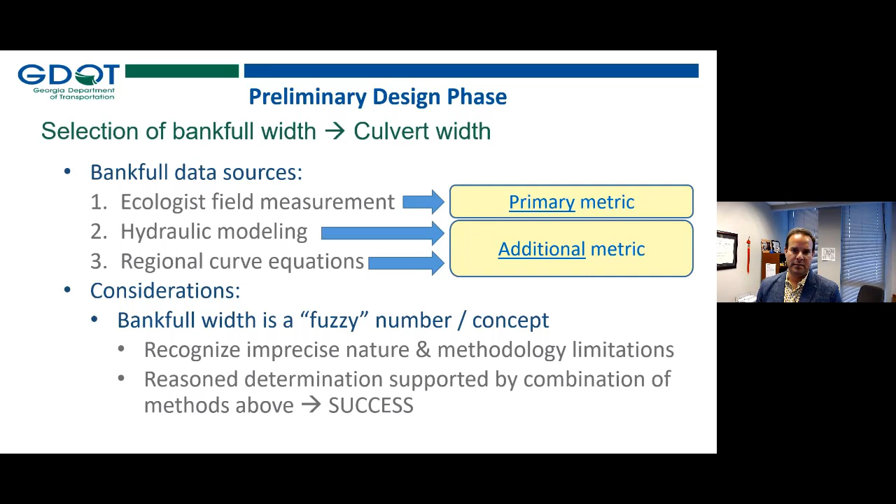So a reasoned determination, which is supported by some combination of the methods above for bankfull, is considered to be success. Some additional considerations: again, this is a main message here, that the width of the culvert needs to be greater than or equal to the bankfull width.

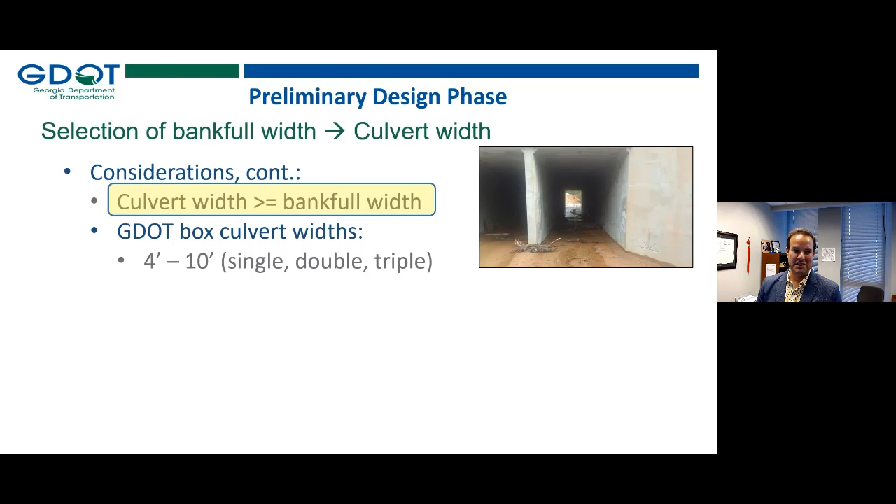Just want to remind people that GDOT has a big menu of culvert widths that designers and ecologists, through their coordination, can talk through what the best configuration of these will be. Essentially even foot increments from 4 to 10 feet in single, double, triple configuration. It gives you a nice menu of things to choose from.

Kind of a fine point here, but it's a nice simplification. Based on our conjunction or coordination with the Corps of Engineers, we can simply disregard the width of the interior walls between multi-barrel culverts. So consider the width of a double 7x7, for example, to be 14 feet wide.

All right, we're getting into culvert design, and a reminder that we are doing this with our new mindset. So I'm going to start speeding up on this on my slide pace here in an attempt to get done on time. So I'm going to walk you through this.

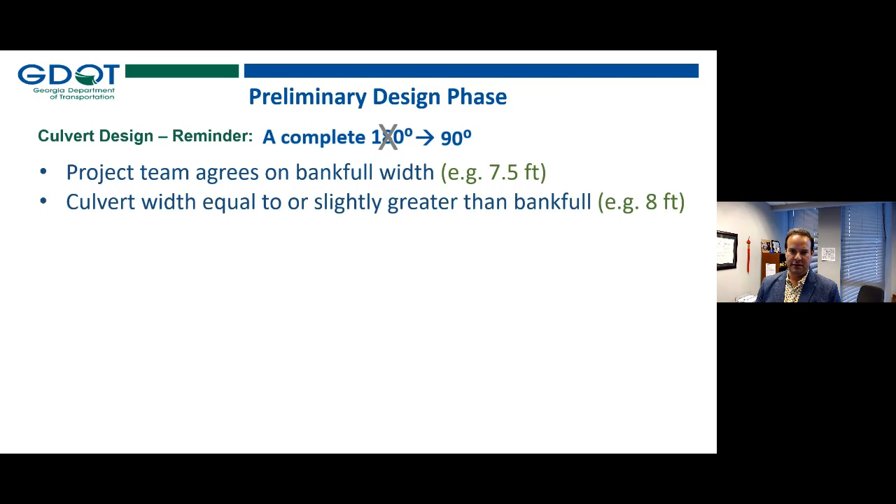Let's say the project team agrees on a bankfull of 7.5 feet. Well, the culvert width having to be greater than or equal to that, 8 foot is an obvious great place to start with that width.

And then we want to start designing that culvert. And we don't want to think about it as just a static slice of roadway embankment, just like we'd throw anywhere with ditches, and then we plop the culvert in, we're done. We want to lay out and iterate horizontally and vertically, just like we would with a roadway, and ensure that we're giving proper tie-ins of that culvert with excavation back into the stream.

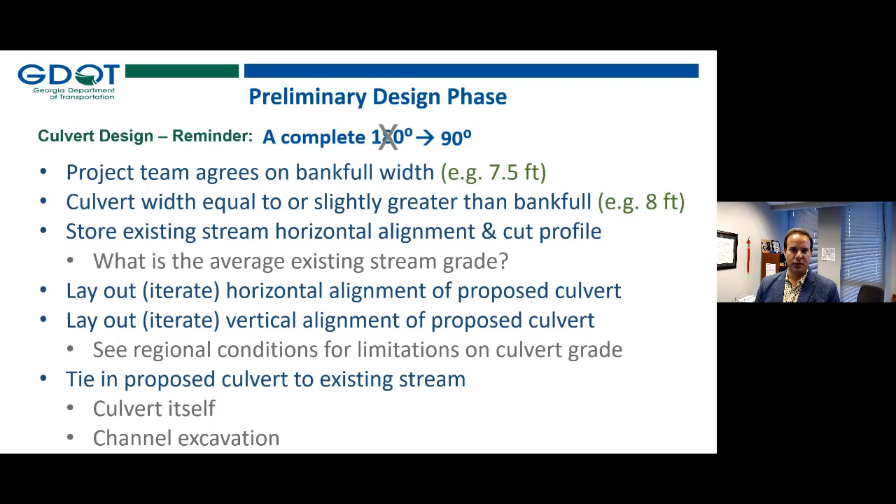So that's the last bullet point I just mentioned. A good tie-in is one of the critical components of this. That can be done through the culvert itself or through some amount of channel excavation.

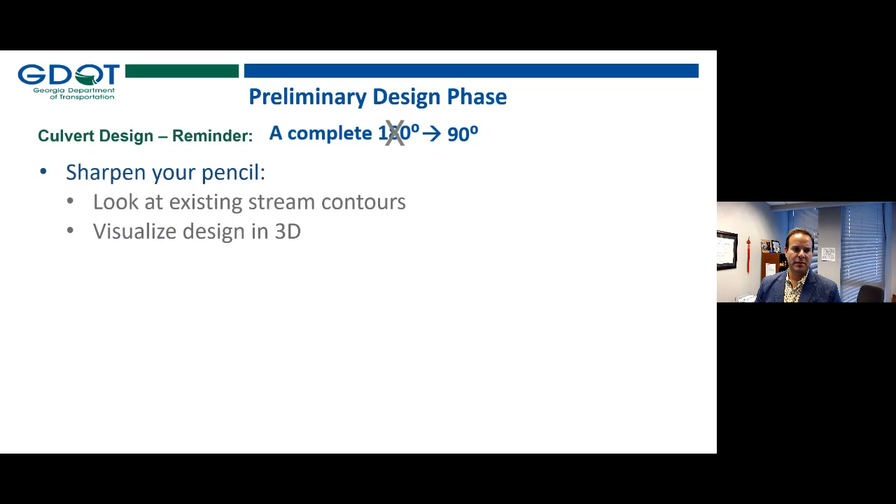Just a few more high-level pointers and general context: sharpen our pencil more than we're used to doing on perennial stream culverts. Look and be familiar with your existing stream contours. This is not easy to do, but if you can, visualize your design in 3D. Consider different horizontal tie-ins. Play with that horizontal alignment of the culvert. Don't think your first alignment has to be what we stick with throughout the process. Would a slight change in that length or skew angle give a better tie-in?

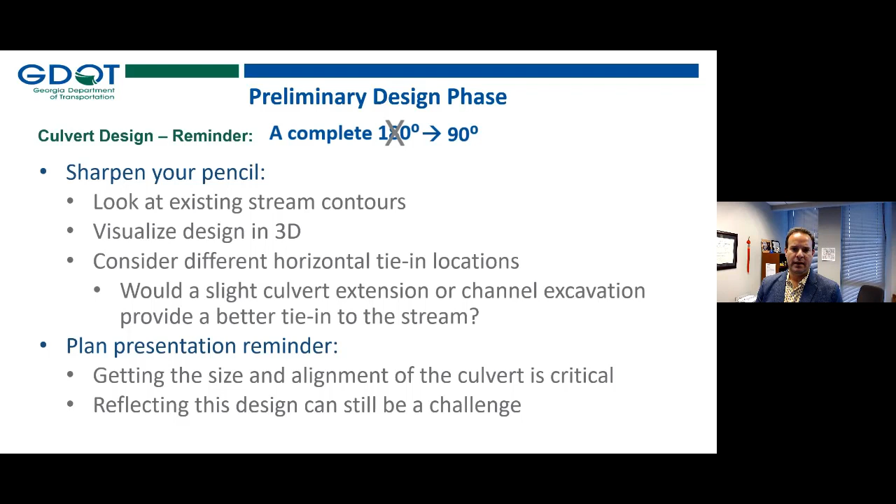Reminder for plan presentation, at this point of the game, getting the design right is what's key. If you've done that, the plan presentation and final design will fall right into place. That being said, there still can be challenges, even reflecting the perfectly designed culvert in plans in a 2D space, which brings us to our last topic here.

I've got a lot of screenshots and high-level examples here, so forgive me if I fly through, but that's probably what's going to happen.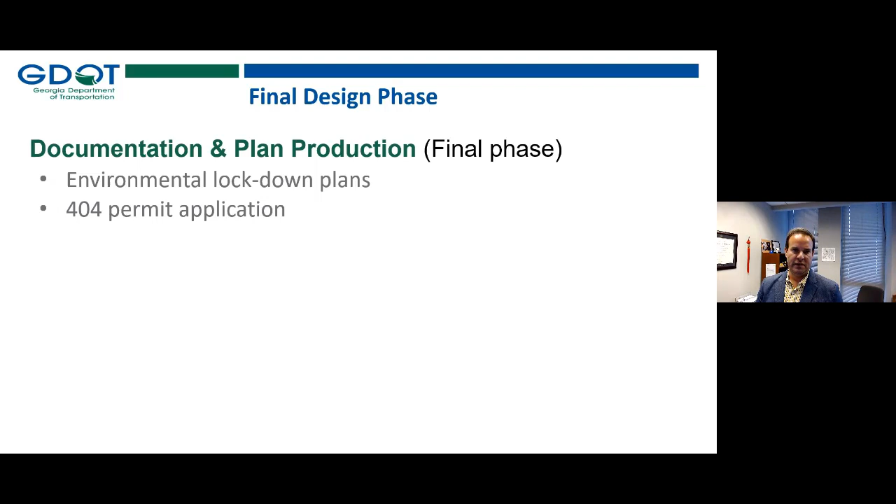So documentation and plan production is the final phase. We are approaching the lockdown plan submission, which the environmental specialist will be using to generate our 404 permit application. If we're really getting down to where we deliver our program.

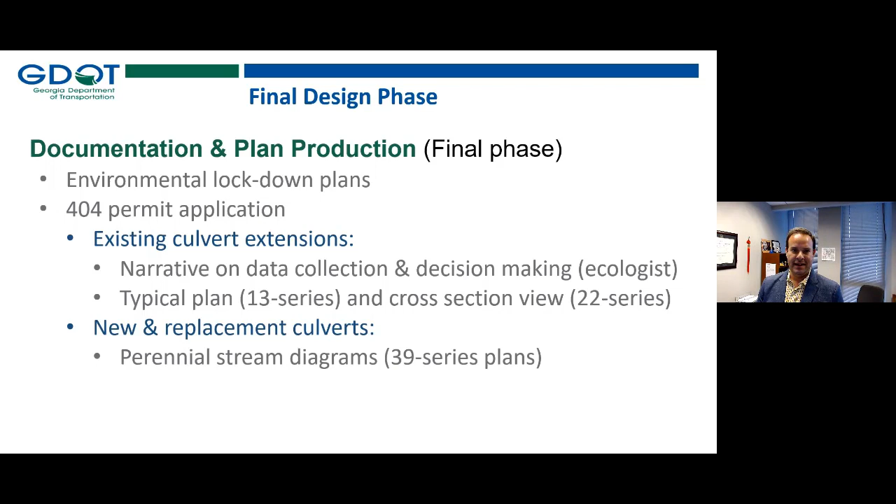As a reminder, for existing culvert extensions, we're going to be providing a narrative on that decision-making process, primarily provided by the ecologist. The designer's role in this is really nothing extra. We're going to provide a typical plan view 13 series and 22 drainage cross-section view for these culverts. But for new and replacement culverts, we will be providing these perennial stream culvert diagrams, aka the 39 series plans.

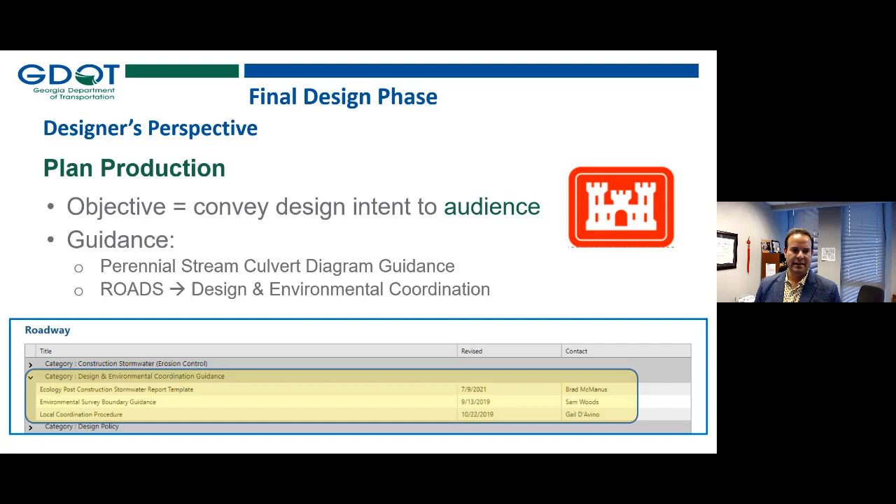A reminder, the whole objective of plan production is to convey our design intent to our audience. In this case, our audience is the U.S. Army Corps of Engineers. Our chief guidance, I've mentioned this over and over again, is this perennial stream culvert diagram guidance, and it's going to be posted on ROADS in our design and environmental coordination. Here's what this looks like.

It looks very much like PPG stuff, because in essence, that's what it is. The audience here is primarily engineers designing these things, but also ecologists coordinating with them while we're generating them. It basically translates the regional conditions into specific engineer, designer, GDOT type instructions.

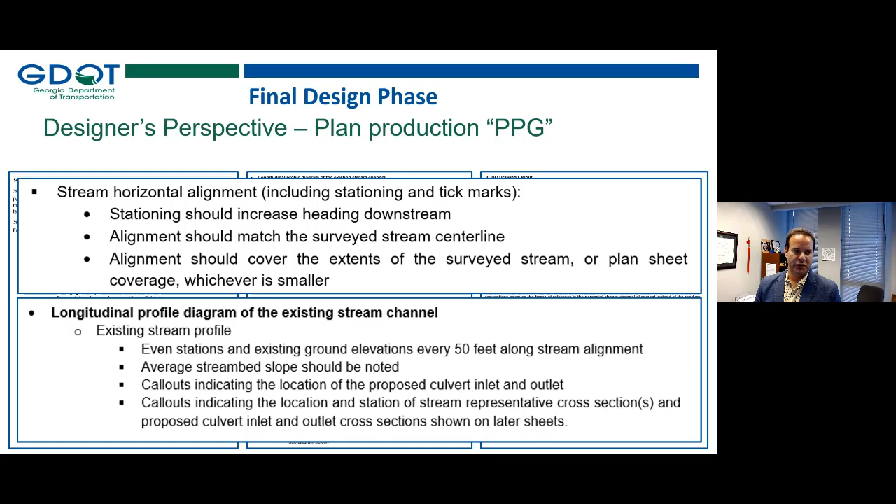Here's just a few examples of that. For horizontal alignment, it talks about the direction of the flow, making sure you have tick marks and things like that. For the longitudinal profile of the stream, it gives some conventions that we'd like to see on those plan sheets, representative cross sections of the existing channel and of the culvert. So these are just examples of that guidance.

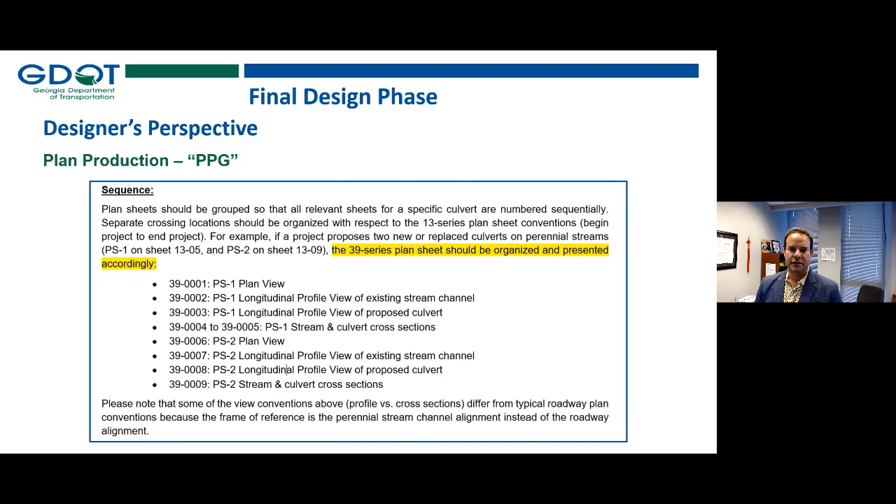The guidance I'm showing so far is for reflecting the design intent of that well-designed culvert. The guidance also includes low-hanging fruit, and please don't discount this. These things go a long way in clarity of our permit applications for both GDOT OES and the Corps of Engineers. Just the fact that we have an order of the plan sheets and we're listing what they are and what size the plan sheets need to be and what scale—these things are very important and should not be overlooked.

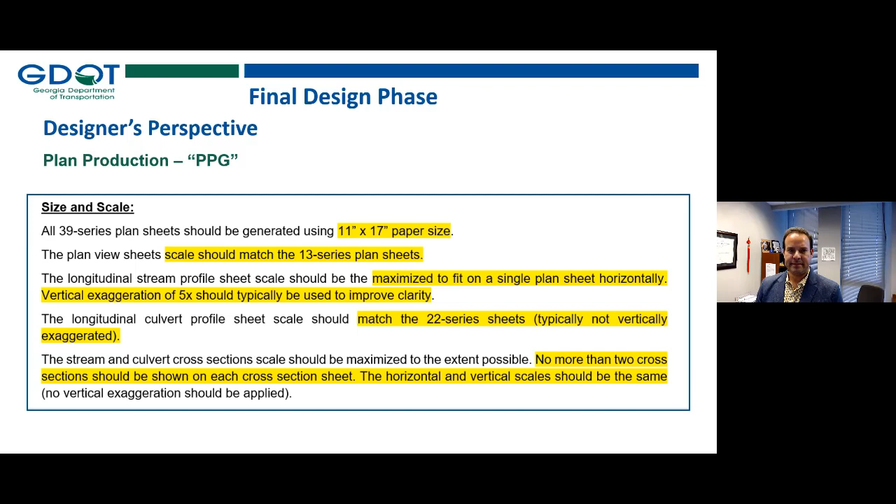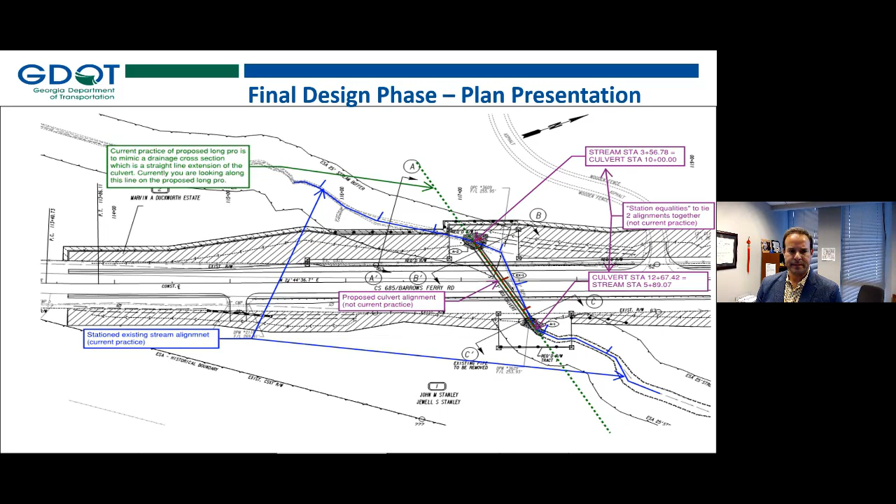This also flips all the conventions I talked about previously. We are no longer talking about a cross-section station with offsets. We are now talking about an alignment, a combined alignment with station numbers and elevations. Similarly to plan view, we'll also need to tie those alignments together with station equalities. So this really is the major change in the diagrams that we are proposing.

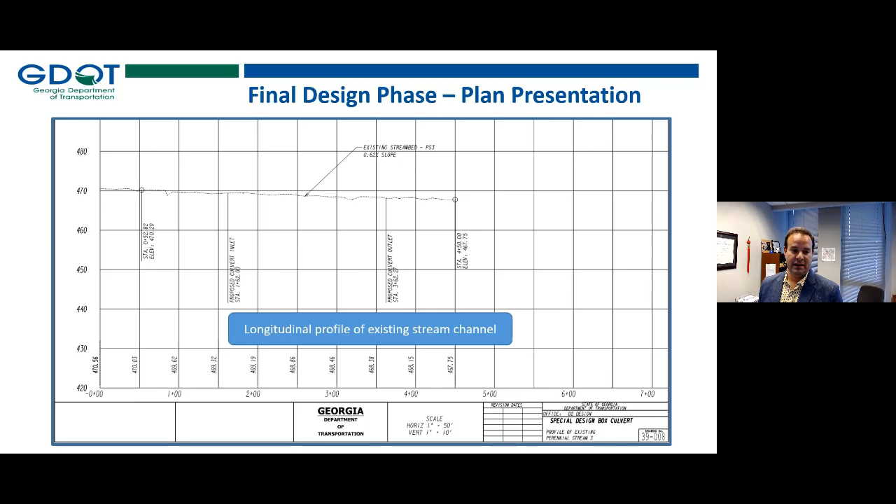The rest of my screenshots here are examples of the much more straightforward diagrams. This is a longitudinal profile of the existing stream channel. There's really nothing much to it. It looks like a profile, right? It looks like a roadway profile, except it's for the stream.

Talking about cross sections very briefly, a representative cross section of the stream that Dave mentioned, also cross sections at the inlet and outlet of the culvert.

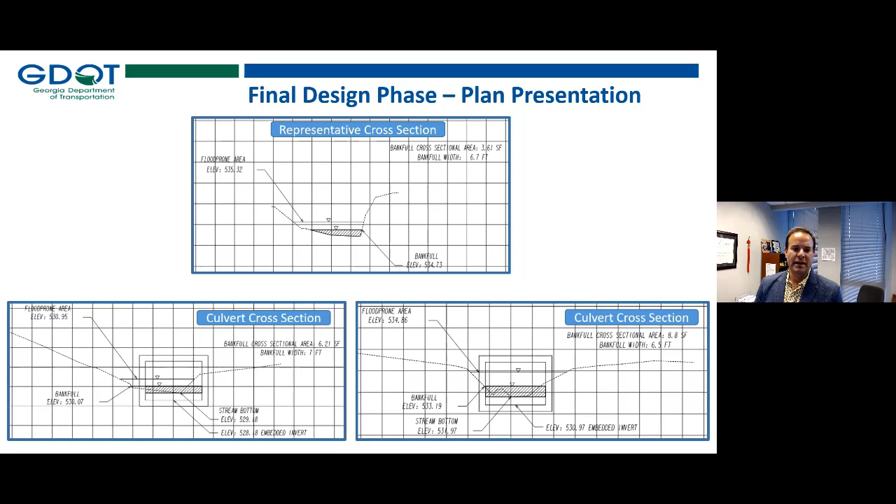I do want to briefly mention that even if you have the perfectly designed culvert, if you look at the bottom left picture here, if you're anything like me with OCD, and I think most designers are, I wish that culvert were shifted over 2 feet to the right. But how can that be? How can it still be that we have the right culvert here? These are discussions that we're having with the Corps, and the answer here is this is hard to do, even with a combined alignment. When those alignments combine, if there's a bend in there and you choose to cut your cross section within a half a foot of two different locations, that can really affect how it's reflected visually.

I would encourage everybody not to get too wrapped up in these shortcomings of the 2D design. Remember that this is a challenge of reflecting a 3D design in 2D space. This is something we've taken the time to explain to the Corps, and we feel like we've made good progress.

That leads me to my wrap up and key takeaways here from the engineer's perspective. We need to work proactively with our team, ecologists, and project management, all the way from concept to permit application. Beginning with the end in mind, the major takeaways are bankfull, grade, and embedment. Another major takeaway is that the 1.5-year storm is the storm to be using in Georgia to approximate bankfull.

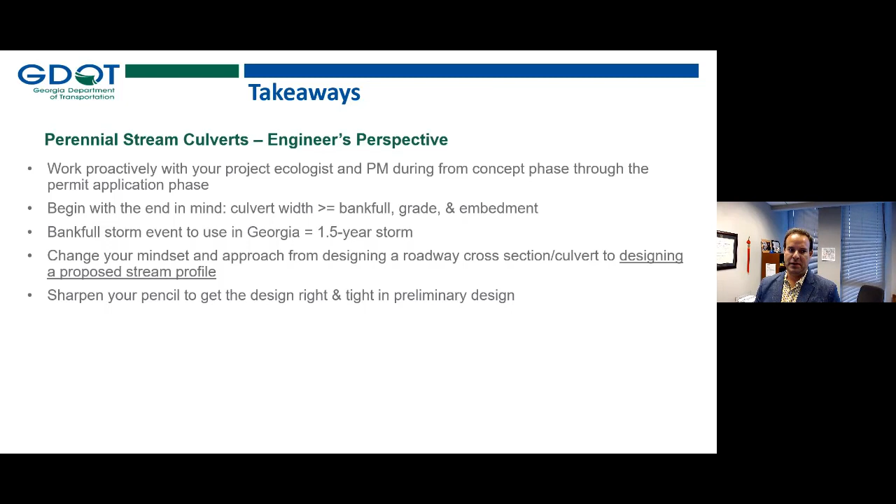I want to highlight this change in mindset, again, from designing a roadway cross-section to designing a proposed stream profile. And please, I ask y'all to sharpen your pencil, get the design right and tight in preliminary design, and that will help us immensely in final design.

A reminder that these requirements specifically for perennial stream culverts do not remove or diminish other requirements that GDOT has, or other agencies, and to utilize our upcoming guidance as the main tool for generating these.

My last one is a bit of a feel-good comment. It's a reminder for designers, especially, to stay positive, proactive, and focused during the ecologist review and comment period of your culvert diagrams. It may seem from your seat that these are being nitpicked to an unreasonable degree.

I can assure you that is not the case. Every comment that ecologist is making is based on experience from past discussions we've had on other permit applications, and any one of these suggestions to improve these diagrams will bring immense benefits during the permit application. All right, we've got just about 2 minutes of wrap-up after this question phase.

I think, Christina, we can open it up to questions. I guess let's start if people have questions specifically for me, and if not, we can open it up to broader questions that Dave might be able to answer also.

Okay, we just have 3 questions total. First, is there or could there be a map developed for Georgia by an experienced local hydrologist showing the equivalent regional curves to be used for different sections of Georgia, to remove the guesswork for less experienced designers?